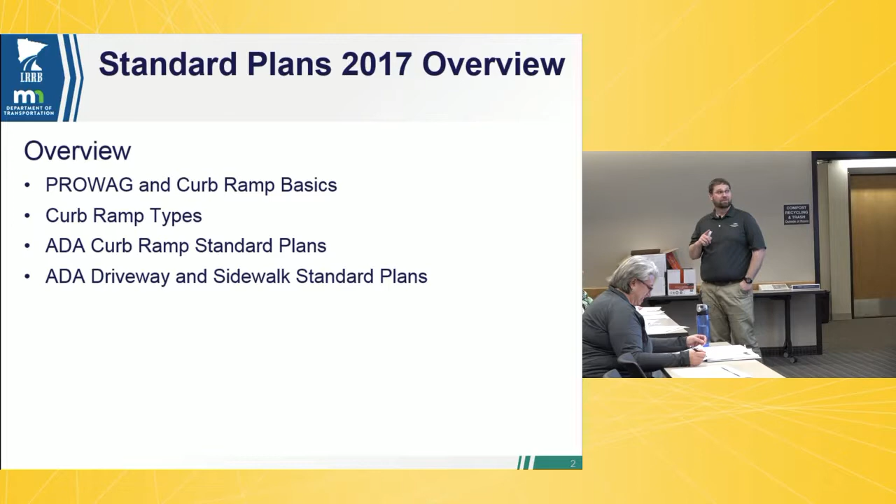In the next couple hours, we're going to talk through ProWAG and curb ramp basics, the curb ramp types, and then those standard plans. In 2010, MnDOT implemented ProWAG, which stands for the Public Rights-of-Way Accessibility Guidelines. Anybody here read ProWAG?

Anybody have trouble sleeping at night? It's a 64-page document, there's a link to it on MnDOT's website. Everything we're going to talk through today is also on our ADA website. If you go to MnDOT A to Z, click on ADA construction, there's a whole website there with links to ProWAG, links to the standard plans, the CAD files, the DGN files for those standard plans. These presentations are on there, and the webinars will be uploaded there soon too.

So all of this information is a really good resource guide if you've got questions. But ProWAG is there also, and ProWAG is really the foundation for what we're going to talk through today. If you've got questions on the why, sometimes there's also the answers on this sheet here on these four. We talk through the standards, and then there's the answer of why we do some of those standards. But if you need further explanation, ProWAG is a good resource.

Now in ProWAG, it also talks about this 4-foot wide pedestrian access route. We have to have that 4-foot PAR with a maximum cross slope of 2%. So ideally, we're shooting for 1 to 1.5% on all of our cross slopes on our sidewalks. But also with that 4-foot minimum PAR, there's a minimum passing area, a 5x5 area every 200 feet.

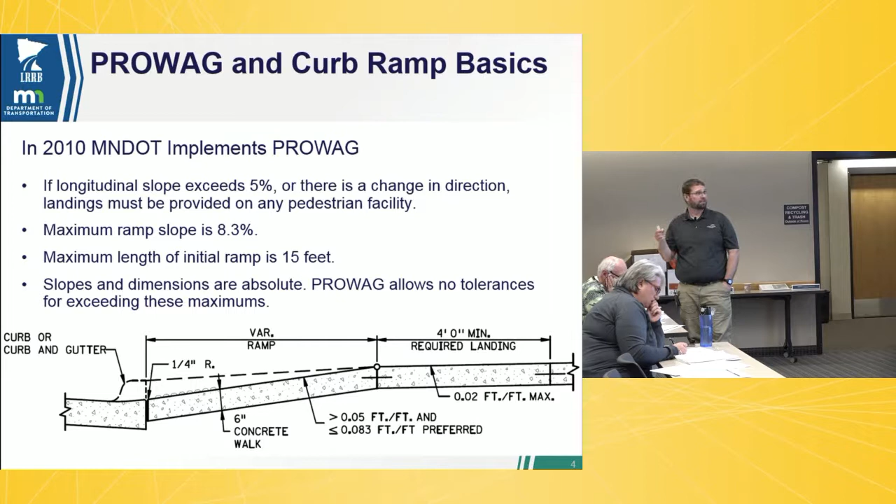That maximum ramp length for the initial ramp is 15 feet, and those slopes and dimensions are now absolute. So there's no variations from that.

So this was the standard plate from 2004. This was a standard plate that I started utilizing in my career. I'm sure that we all built a lot of plan sets utilizing this standard plate. We went along and we had our road corridor, and we had our street laid out there, and we got to the intersection. We said, build a ped ramp. We put a note, and we moved on to the next section of road.

In this standard plan, all of our ramps were based off of our lengths. So if we had a 6-inch curb height, we had a 6-foot ramp. And actually the ramp was 5 foot 4 inches because we included the 8 inches from the curb and gutter from the back of the curb too.

So that works for a 1 to 12 in a perfectly flat world. Does anybody here design intersections in a perfectly flat world? No. There's a few places out in western Minnesota that get pretty flat, and they don't even have some of these flat intersections. So it doesn't work.

It's not practical. And also on here, we had the desirable 4x4 relatively flat landing. There's nothing in there that says that landing area is desirable. It's required. We have to have that landing area.

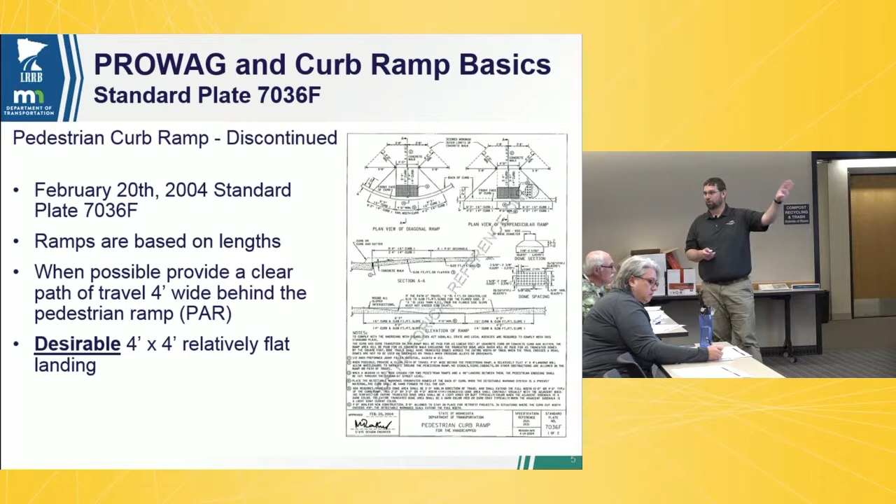So essentially what I'm telling you here, when we built ramps like this, MnDOT went out there and did our inventory on everything. When we looked at just the running slope and the cross slope on the ramp, just those criteria, we exceeded those maximums on 50% of our ramps. Just on those two criteria. Essentially, this is just what we were building. We built these for years, and the majority of them are non-compliant. So in 2011, we changed this detail sheet, and we built all of our ramps.

And all of this is switching to be based on ProWag, and the ramps are now based on the grades. So we're now working off of those ProWag maximums and minimums, and we required that we have that 4x4 relatively flat landing at the top of those ramps.

So this is where we started to go as far as our progression. Now, the other part is that we started off with, like I said, we put our roadway in there, we put a note and said, build a ped ramp. Then in 2011, we started to get into this, 2012.

And construction folks went from, we just had a note, to design and detail everything out for me, okay? And we ended up with quadrants that we had 20 or 30 elevations given on the plan sets for each quadrant of the intersection, okay?

How many folks in here have done surveys? Few? How many of those people have pounded in 20 or 30 hubs for elevations on a quadrant? Nobody. Contractor would laugh us out of the room, right?

Plus, I mean, and the other part of it is we were designing those 20 or 30 grade points off from aerial LiDAR, plus or minus 6-inch data that we were getting inputs on, and we're designing all the way through here. The other part, and actually if you watch some of the slides here today, you're going to see a number of examples where we go too far, okay?

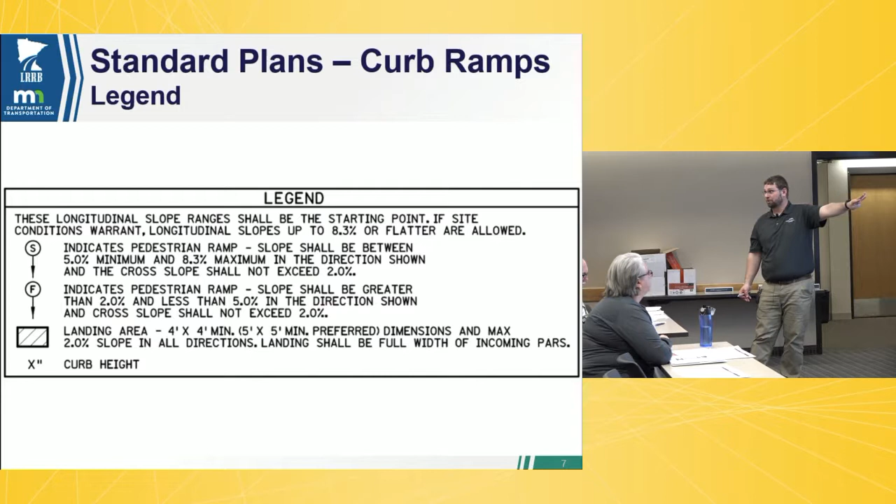So those are the 4 key points that now we're putting in and utilizing this standard legend. And again, this standard legend, and it's actually much longer than this, but these are the 4 key components on it. This is on MnDOT's ADA website also too. There's a DGN file that talks about what's all going, that gives you all of those symbols.

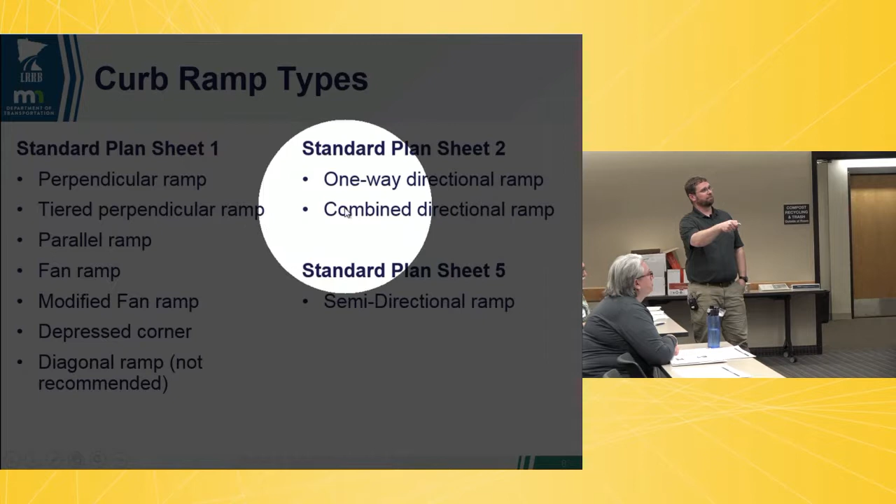So here's our curb ramp types. If we took these two, the directional ramps, and slid them right underneath our perpendicular ramps, this list on the left-hand side is my priority list. So if I can build these ramps, I'm going to build perpendiculars, directionals, then get into my fans and my depressed corners, and at the very bottom of the list is my diagonal ramps. This is my priority list.

So on my second ADA project that I did with MnDOT, I went out into the field. We did a constructability field walk, and we were walking through it, and we got to the first area, and Harvey from the ADA office looks at it and he goes, 'Tim, you've got this too flat.' I laughed because that's kind of how I handle situations, and Harvey's a little bit more stoic. He didn't find it as funny as I did. But I said, 'This is ADA. It's supposed to be flat.'

And we proceeded to have a long conversation about how it's not just about being flat, it's about being sustainable and being maintainable. That's something we've really come to see and evolve about over the last 5 or 6 years too - we've got projects where we're going to be putting down this concrete, and when we put this concrete down on the ground, how long is that concrete going to be there for? 30, 40, 50, 80 years? I mean, how often do you have concrete that you've seen that's been there for 80 years? When we put that concrete down there, it's going to be there for a long time.

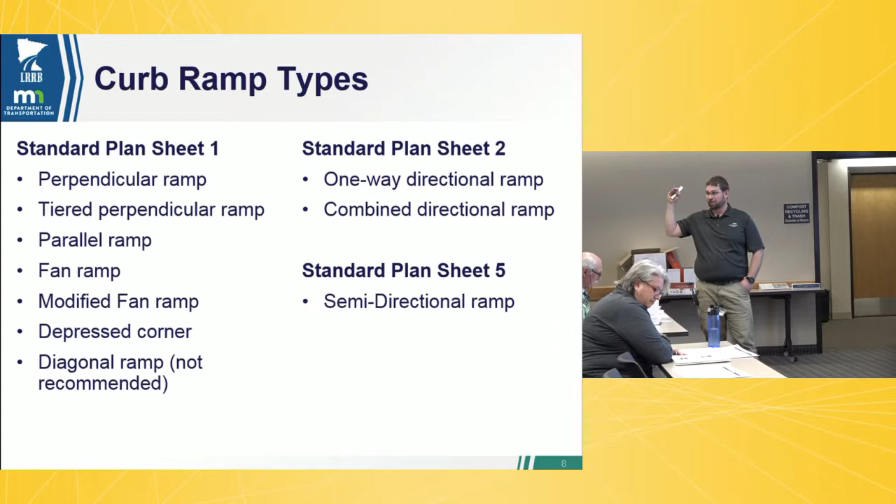So in the afternoon we're going to talk through a lot of things we can do as far as some little improvements to these intersections and ramps that are going to make a big difference to be sustainable and maintainable as we're going forward. So this is our priority list - that's why, if we can, we always want to build our perpendiculars, our directionals, and then proceed down the list.

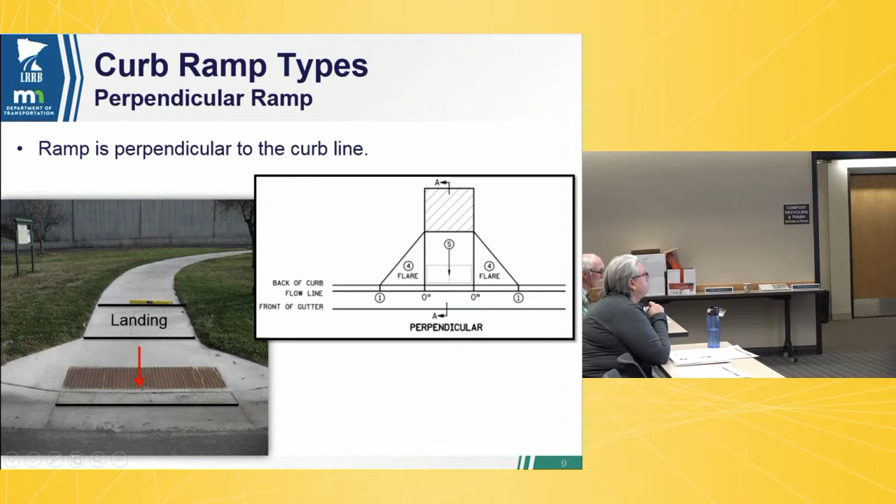So we'll talk through these one at a time. Perpendicular ramps - these are the easiest to build. You've got a nice tangent piece of curb and gutter. Your ramp is going to come right down here in a perpendicular direction, meeting that curb line. We've got a perfectly nice even ramp.

We've got a landing shown on here. Now if this sidewalk is coming in at less than 5%, and we don't have a change in direction on this particular example, you wouldn't have to have a landing. However, I would highly encourage that we make sure this initial ramp in here is a steep ramp, so that we're up and out of that gutter line, maintaining that flow line in the gutter line and not up into our ped ramp. And then you have your landing and then you take off with your nice sidewalk from there.

The next one is going to be a tiered perpendicular ramp. This is the same situation, but the difference is we've got a very narrow boulevard. So when you've got a 3-4 foot wide boulevard, you've got enough distance in there to get a ramp, but you're not going to get your landing up to your full sidewalk height.

So then what we're going to do is we're going to have this landing up here, right there, and then we're going to have flat slopes coming in from both directions. And we don't want to have steep slopes coming in on our secondary ramps, because we always want to make sure our sidewalk profile is less than 5% unless our roadway slope is greater than 5%.

The other part of this is, let's think about it from a practical standpoint. I'm walking down my sidewalk. If I'm just going in a straight direction, do I really want to go down 8% for 5 feet to then come back up 8% at the other side of the landing? It's going to be very awkward to be walking up and down that sidewalk.

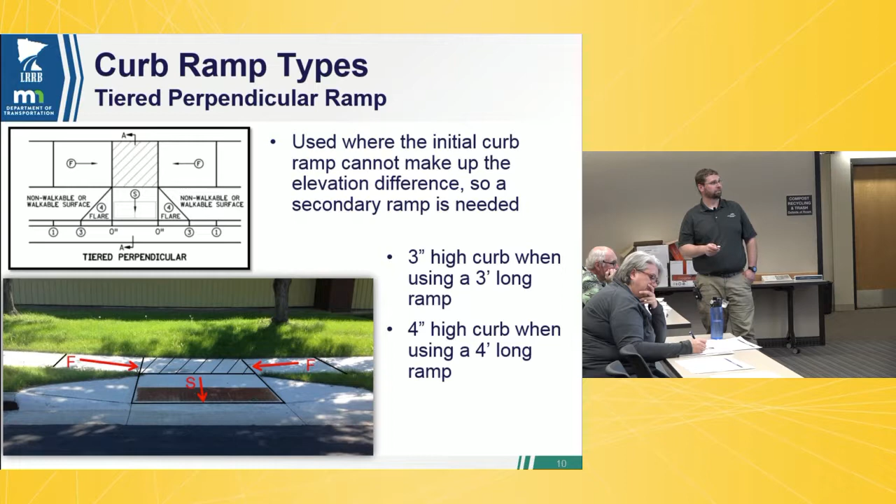Next one is our parallel ramps. Parallel ramps are going to be utilized whenever we have sidewalk at the back of curb and our sidewalk is less than 7 feet in width. So if I have a 7-foot wide sidewalk at the back of my curb, I'm going to put in a 3-foot ramp and have a 4-foot landing behind there.

But if I've got a 5-foot sidewalk or a 6-foot sidewalk at the back of the curb, I'm going to have to utilize a parallel ramp. It's basically a depressed corner. Everything from my gutter line all the way through the back of my landing is all 2% max in any direction. It's all landing area.

So then with that, my initial ramps are now these first ramps coming up the sidewalk line here. And I'm wanting to make sure that those are steep ramps now, because I want to get up and out of that gutter line as quickly as possible. Because this area, that landing area, is going to be prone to having ice and snow buildup in there.

And doing this, then those are steep ramps, so we've got to have a secondary landing at the top of those ramps. That's why we've got these secondary landings hatched up here on both sides.

And then also, you'll see the curb heights in here. So we're going to clearly define where our curb heights are going to be, because the top back of your curb profile, the tapers on that, is going to define what your sidewalk profile is. So you've got to make sure that taper is built to the ramp slope that you want on your sidewalk. Clearly defining where that 6-inch curb is is key to making sure these ramps are constructed right.

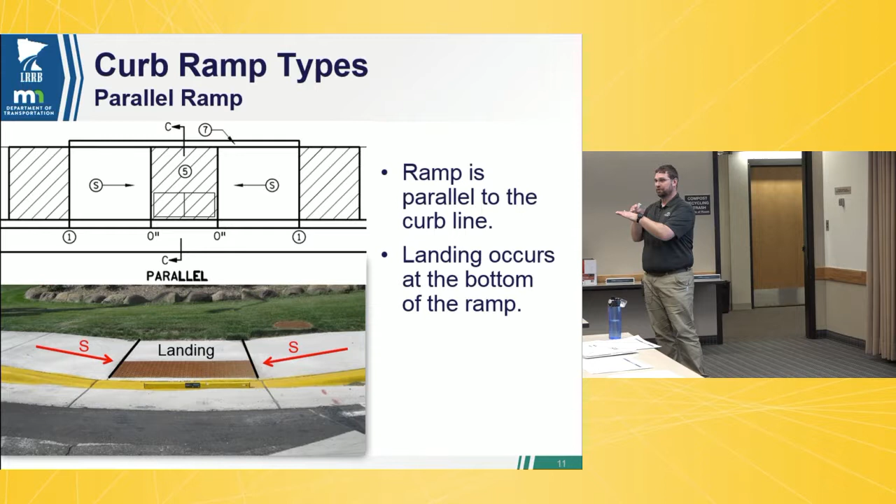Because if you don't do that, you're going to end up with a warp on your sidewalk on the back side, where you're either pushing drainage back onto your ramp, or that's also a spot that if this is being cleared with a skid loader, you're going to ride up on the curb and ride on the back of the sidewalk, and you're going to have a little area in between there that's not going to get cleared of snow and ice.

So making sure that we have our curb heights on here on these parallel ramps is going to help make sure that they're constructed correctly.

Next ones are going to be fans. With those fans, we're always having those fans constructed with flat slopes, so everything between 2 and 5%. A couple key reasons why: first off, under PROWAG, fans are treated as blended transitions, and blended transitions need to be less than 5% slope on them.

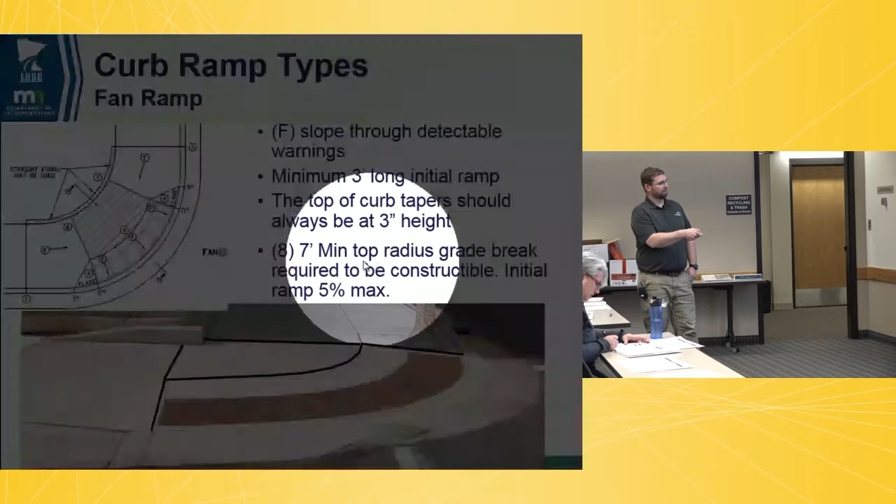The other part of this is if I'm a user and I'm coming along my sidewalk here and I'm going to go straight across the roadway, as I come through here, I should stop on that landing and navigate that ramp in a perpendicular direction, so that way if I'm in a chair, my front wheels go off and onto the ramp at the same time, going down the ramp, and then my back wheels go onto the ramp at the same time.

But chances are we're just going to go straight through this section, and as you do that, you're going to end up with that front right tire going off into the air. So I'm on 3 wheels, then ideally maybe I drop down on the other 2.

As you're going through this section, you're going to have a potential to be on 2 wheels, especially if you're on a steep slope with a real tight radius—you've got a real potential to flip. One of the first people from an early class said they realized this pushing their kids through on a stroller: you're only on 2 wheels going through those intersections, and you can rock them in the stroller as you're going through there. So when we've got those tight radiuses and steep slopes, you've got that potential.

So we've also got a 7-foot minimum radius on the top. That's this area right through here, this grade break—7-foot minimum radius, okay?

Part of that is mostly a constructability issue. We've tried to construct them with tighter radiuses, 3-foot or 5-foot radius on the top. Contractors and suppliers will give us the truncated domes for it, but when you try to put those domes on a slope surface going around that tight curve, it's extremely difficult to do. I'm going to show you an example we tried on one of our projects—it took us a couple times to pour it to get it right. It's one of the examples of why we have this 7-foot minimum as a standard now at MnDOT.

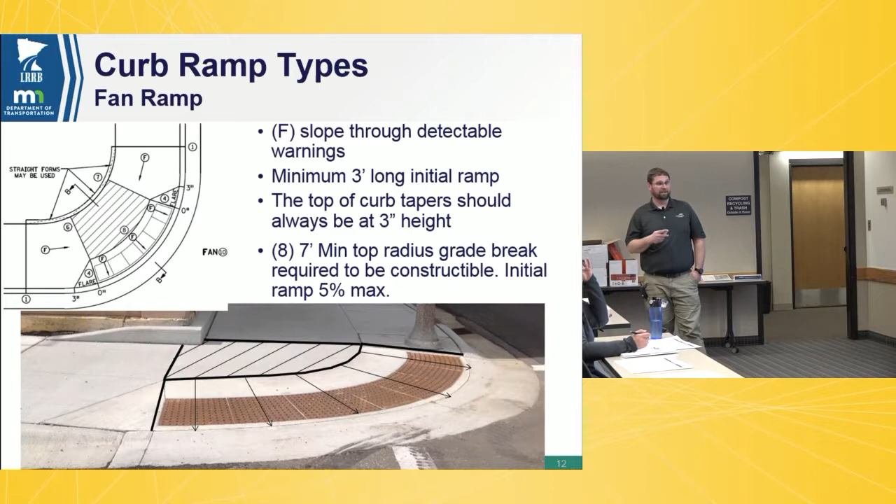The next one is going to be a modified fan. It's the same as the fan, the only difference is that if this was a fan, our grade breaks would be right here. We've pushed those grade breaks up in both directions so we can get our 4x4 landing in there. If my grade breaks were in line with the back of the sidewalk, I wouldn't have enough room to get my 4x4 landing in there. So this modified fan pushes it back.

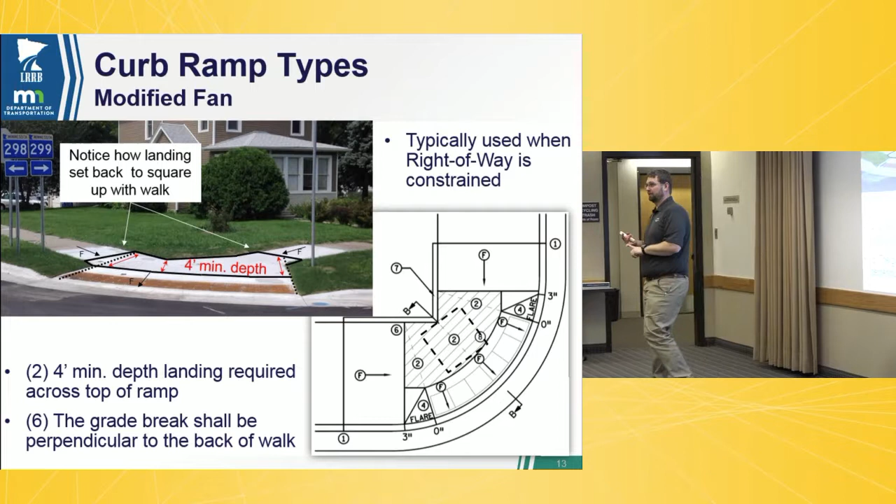It's a good tool to utilize when you've got a really tight right-of-way constraint, when you don't have a lot of room between this pinch point on your corner and your curb line. All you need is 7 feet in there and you can make that work—you can get your 3-foot ramp in there with your 4-foot landing at the back of it. It's a good tool to use on those tight corners. We're going to talk today about how you can widen out this corner to make it work, but ideally you'd do some of those other modifications to have more room. If you can't, the modified fan is a good tool to use.

Next one is our depressed corner. Depressed corners are towards the bottom of our list of what we want to utilize, and the main reason is, yes...

4x4—you can do a 4x4, that's the minimum required. Yep.

On our depressed corners, very similar to our parallels, the landing is everything from the back of the curb, from the gutter line back. So the gutter line back is all less than 2%, and this whole area in here is all less than 2%.

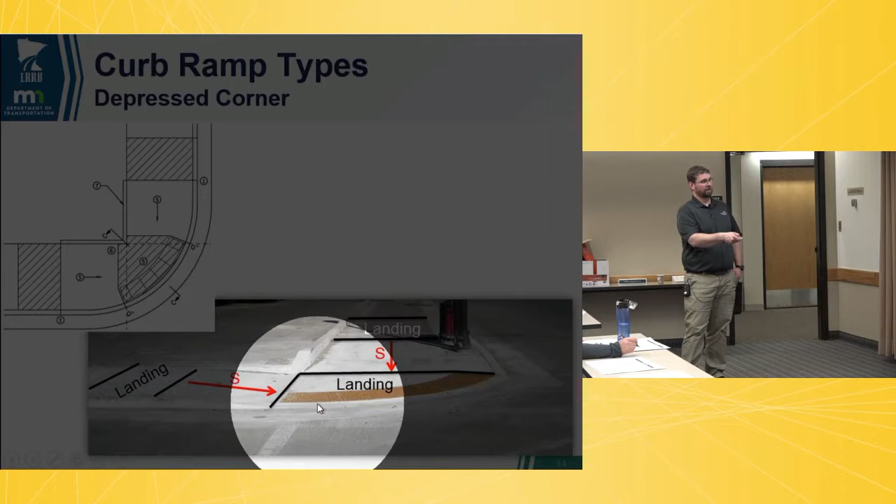Depressed corners are very prone to ice, debris, and those types of things since your water is just flowing right into there. They're very low on my list, but if I'm at a high point in my road as far as the intersection, with water going both directions around my returns, I'm not going to hesitate to utilize a depressed corner in that instance. Because all I've got for water coming into that depressed corner is just what's falling on that intersection and draining back towards it, so I'm not as prone to those ice and sediment issues when I've got that at a high point.

Now, we can create a high point too, and we'll talk through some of those scenarios. We'll add a structure, maybe on one side, if there's already one on the other side, and create a new high point as we're going around there. That way we have that potential and we're not running water across there. If I've got a whole block's worth of water coming down here, I'm not going to put a depressed corner in and run a block's worth of water around a depressed corner.

That's not going to be a maintainable, sustainable solution. But when we've got to put these depressed corners in, a lot of times we're going to utilize them when we've got tight right-of-way constraints or we've got APS where we're trying to fit a lot of things in. Those types of situations, we're going to end up with some depressed corners.

When we've got the depressed corners, then those initial ramps are going to be following the top back of curb profile, and those are always going to be steep because we want to get up and out of that gutter line as quick as possible.

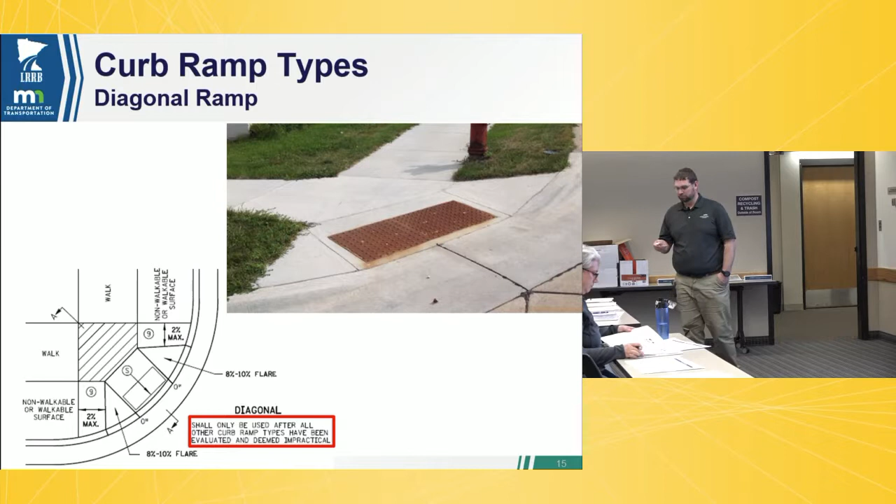And this is why: because we're pushing all that traffic right out into the middle of the intersection. Whether it's a chair user, whether it's a visually impaired user, all those things, they're all going to end up right out in the middle of that intersection on a diagonal ramp.

Next one is going to be our directional ramp. So remember, perpendiculars was number 1, directionals is number 2. With the directional ramps, all of this area in here, this curb line here, where note number 7 is, that's max 2% slope in any direction.

So it's constructed to the same constraints as a landing, and that is poured integral with the curb and gutter. They pour the curb and gutter, they're pouring that directional curb with it. All of our contractors on MnDOT projects have been pouring this integral for a lot of years.

So if any of them are giving you a hard time, saying no, MnDOT's not making me do this - no, they are making them do it. It's all constructed that way. It helps us to end up with a better end product, that we've got a seamless, no joints along where that back of curb line would normally be.

And just to be clear, it's this 2% to the same slope as a landing, but it doesn't have to have the area requirements - the area doesn't have to be a 4x4. Basically, that just all needs to be there though, so you have a perpendicular grade break at the bottom of the ramp. So your top 2 wheels going off the top of the ramp being the same, here where they hit the bottom of the ramp, it needs to be perpendicular.

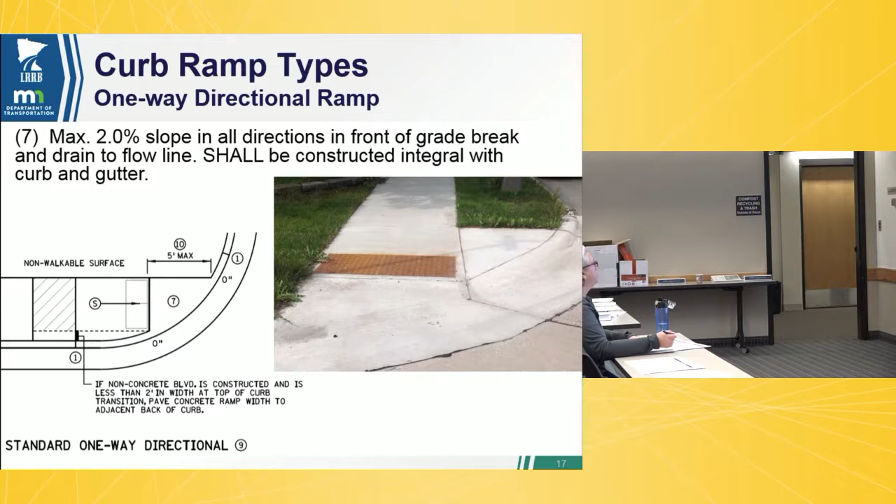On this previous one, when we've got a walkable, non-walkable surface here, the non-walkable surface is our grass or aggregate surfacing, so we can have that grade break with domes set back 5 feet. If we exceed that 5 feet, then we put our domes at the back of curb. When we do that, we want to make sure those domes fully cover the walking path for a pedestrian going up and down. That's why there's a little bump on the back side of that walk as you're coming through, so I've got 2 feet of domes across my entire path of travel. If I just left this as a straight piece of concrete, my domes would come out at an angle and I'd have a step-through at that location. So that bump ensures 2 feet of continuous dome coverage across the opening. Part of that reason is because in Minnesota we have to use cast iron domes, and we don't want to cut those because they're difficult to cut, don't always seat well, and have ragged, sharp edges. So we have more limitations due to winter maintenance requirements of the materials we use.

Next is our combined directionals. A combined directional is still just that directional ramp, but with a combined landing. A lot of times if you're working in a residential neighborhood with nice big boulevards, you'll end up with combined directionals or combined perpendiculars. The only difference is that perpendiculars deal with a tangent piece of curb and gutter, while if you're in the curved portion of your curb and gutter, you'll end up with directional ramps. The best type of ramps let us walk in either direction on this sidewalk, just walking straight across the road, without any change in direction needed to navigate the intersection.

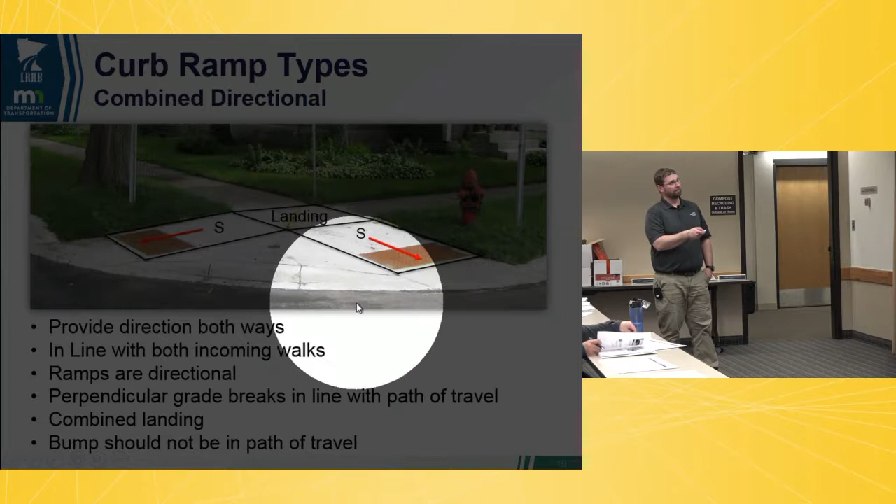We've got that combined landing utilized for both ramps, and we still have those perpendicular grade breaks, because a visually impaired user relies on the first two cues to know where they're going: one, the direction they've already been traveling, which tells them to keep going that way across the intersection. The next cue is the ramp direction, which points them across the road. So anytime I can give that directionality, whether perpendicular or directional ramp, I'm pointing that visually impaired user across the road. We also want to make sure this bump in the middle of the walk isn't within the path of travel, because otherwise we'd be creating a trip hazard.

Again, on dome setback: if we've got a non-walkable surface, like turf or aggregate surfacing, those domes can be set back 5 feet. If it's a walkable surface, meaning bricks, pavers, concrete, or asphalt, the max setback is 2 feet from the back of curb. So if I have a signal pole, light pole, or fire hydrant right at that intersection, I'm going to consider that a non-walkable surface. However, if that same obstruction is 15 feet back up the roadway, that's a walkable surface. That's where you have to use engineering judgment as to whether there's potential for someone walking down that sidewalk to walk out into the road and miss those domes. That's what we're trying to stop from happening, making sure there's notification that a user is about to enter the roadway.

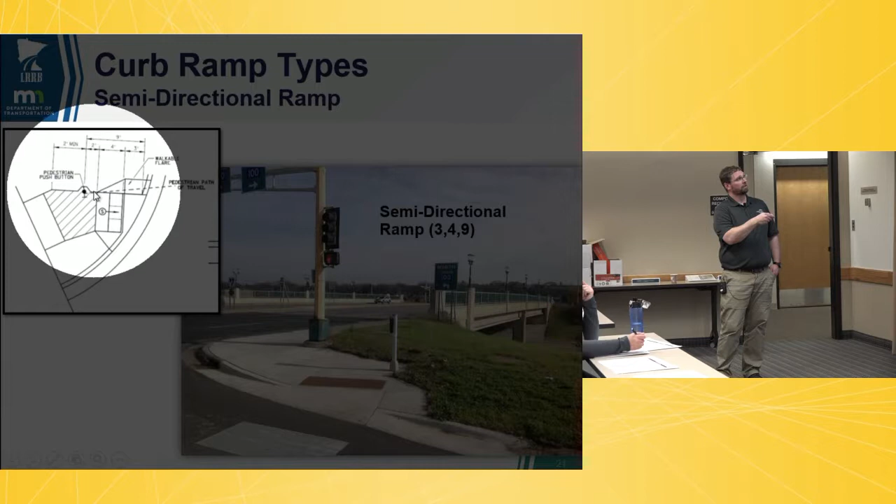Semi-directional ramps are a detail thrown into the plan set. It's primarily utilized with APS systems in more of a rural application where we've got a large sweeping curve. If we were to provide true directionality on this ramp, we'd exceed our setback for our APS system. So we're swinging this ramp around to give it as much direction as possible. This dashed line is my path of travel, trying to get directionality out of those ramps, but we'll call this our 3-4-9: a 3-foot setback on my domes from the back of curb, a 4-foot ramp, and 2 feet to my push button on the landing. So that push button ends up being a total of 9 feet from the back of curb.

When we look at APS criteria, the maximum that we want to be with that push button is 10 feet. So if I provided true directionality on this one, I would exceed that 10-foot setback. So it's a trick, a detail that we've been utilizing quite a few times trying to get as much directionality as we can, but still utilizing that APS and not exceeding that 10-foot setback as we go around here. This is one instance here where we do require a walkable flare.

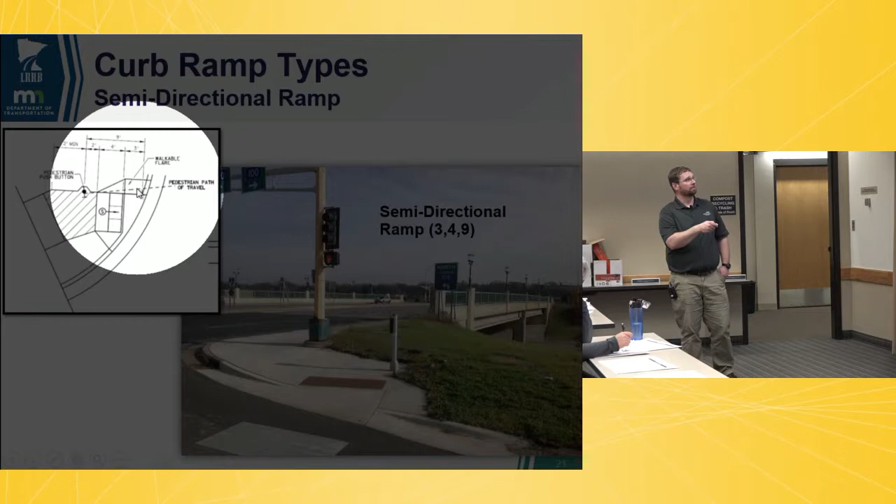This area here, this flare, is a concrete flare. A lot of times on a lot of the different ramp styles that we're going to talk about, flares are up to the local city's preference, if you want a graded flare or a concrete flare. But in this particular instance, if we've got the path of travel that's going to go across those flares, then we want those to be concrete, so that we don't have that grass lip as far as a trip hazard going up and across there.

So sheet 1, these plan sets were revised in 2017.

So I got a question. You went through your ramp types, and in Minneapolis, when the mall was redone recently, if anybody's been in Minneapolis doing a mall experience, the intersections, the design of the intersections actually were raised up, so there was actually no grade change as you cross the streets there. It's the flat surface except for the ramp step. My question is, that's kind of a different style or type of ramp than what you're showing here. And my question for you guys is from a user experience, when I walk through it, it's pleasant because you're not walking down and up. Being accessible, is there anything by not having those grades that might be noticed?

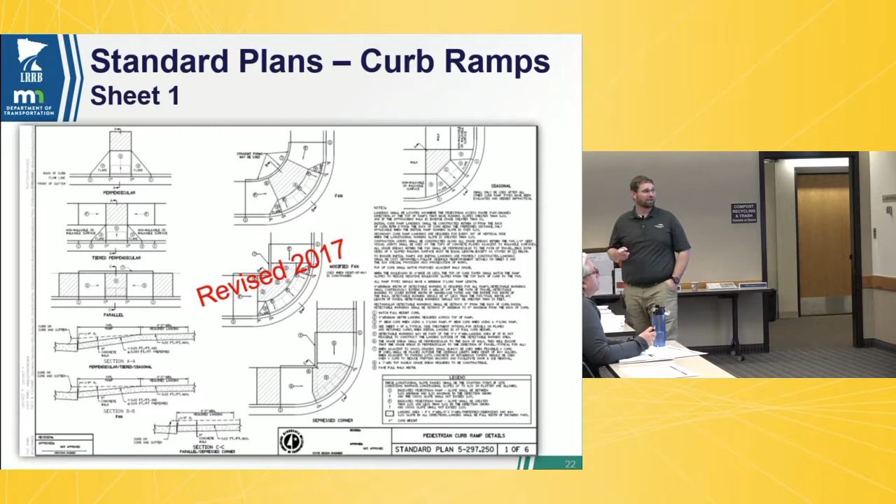The good news is that in conversations we've been having, we're not foreseeing another plan set coming out in the near future. I'll be happy to eat my share of crow pie if I need to, but that is not our anticipation right now. These standard plans will be here for quite a while. I totally understood the frustration too, because I was right there with you guys - I'd turn something in and all of a sudden they're like, Tim, you only have version 5, you need version 6. But these have been around now for a year, so we'll talk through these in detail now.

A couple notes, can't stress this enough: landings need to be located anywhere the pedestrian access route changes direction. So in this case here, I'm coming down my sidewalk, I've got a ramp going off to the side - that's a change in direction. I need to have a landing wherever there's a change in direction. That may be a walk coming out from a home - that's still a change in direction for someone. We need to have a landing at that location.

At the top of all those ramps greater than 5%, whenever we've got those steep ramps - that's why we have this distinction between greater than 5% and less than 5% - we go greater than 5%, we've got to have a landing at the top of those ramp slopes. And then also if our inverse grade is greater than 2%, so if we've got those tenting effects, then we need to have a landing at those locations also.

Our initial curb ramp landings need to be constructed within 15 feet of the back of the curb, ideally we want to be 4 to 6 feet back. So if I'm back 15 feet sitting on the landing, with my roadway 15 feet away, and then I'm having to cross a 30-foot wide roadway, I've just added 50% onto my crossing distance, because as a chair user I'm going to sit on the landing and navigate that intersection from there. Now, if I'm back 15 feet, think about being a chair user at that position and how well you can see to make decisions about where your traffic gaps are. And then the other part is where a driver is going to be looking for pedestrians to be starting from. So ideally we want those initial landings to be 4 to 6 feet from the back of the curb.

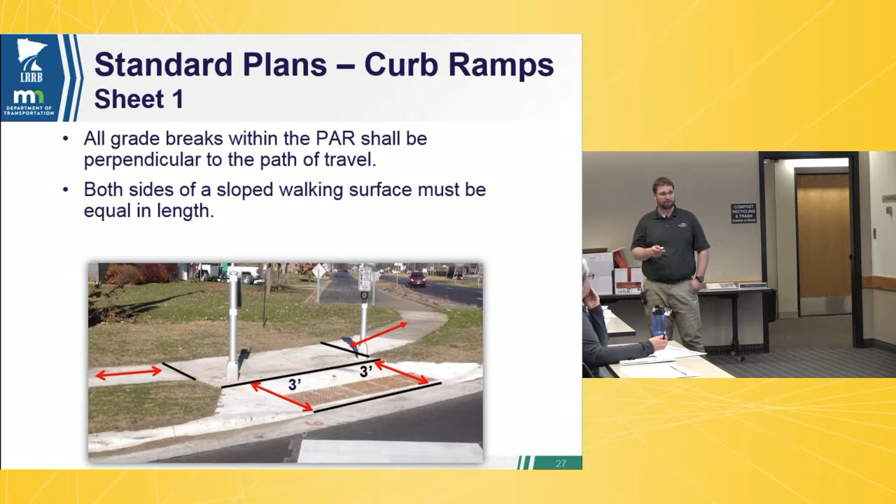So in this case here, we don't have a perpendicular grade break. My grade break should be right across in here, is where that grade break should be. So we want to make sure that those ramp lengths are all the same length, and that our landings are all constructed properly. And what happens is that in this instance here, we would have ended up with this.

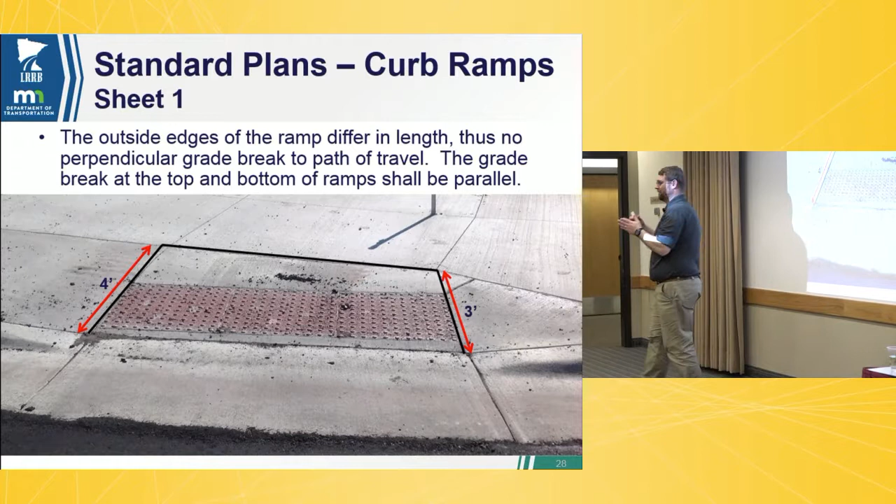Here's always the problem, okay? When we have nice square intersections in a residential neighborhood, we end up with nice landings that are all squares, right? And we're all engineers, we like to deal with squares. Sometimes we step outside of our comfort zone and we'll deal with a rectangle. We've all built stormwater ponds that are all rectangles, right? Now sometimes these landings are going to end up being some odd shaped polygon, okay?

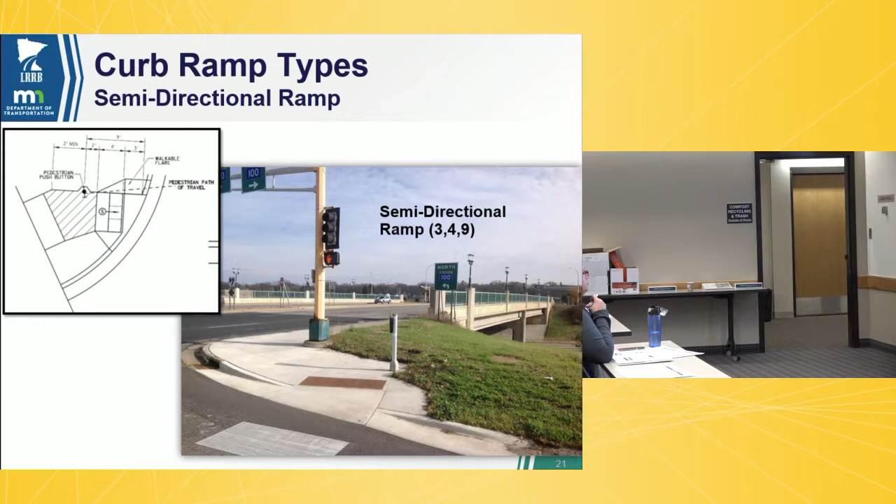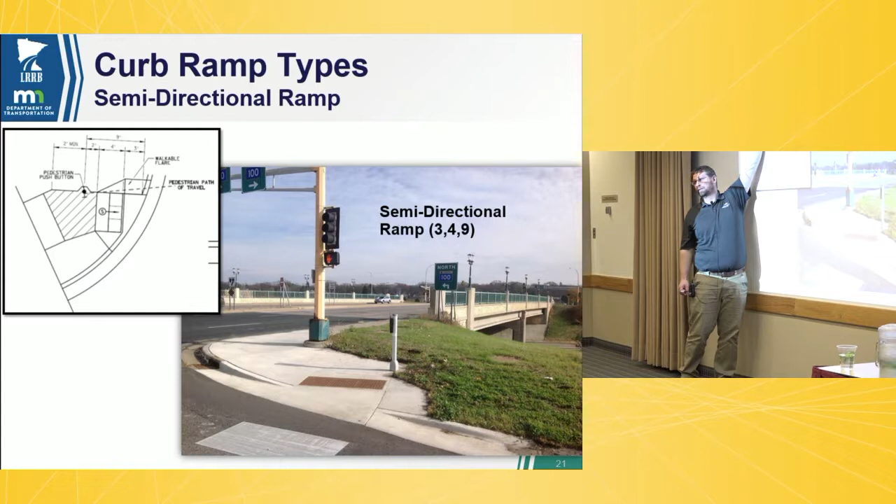In this instance here, here's my direction of travel, so my grade break has to be perpendicular to that path of travel. Over here, here's my direction of travel, my grade break has to be perpendicular to that path of travel. So when you're working out all these different directions that you're coming and going off of your landing, that's where you end up with those perpendicular grade breaks and these odd shaped polygons as far as your landing. So that's why we need to clearly denote on our plan sets where those landings are at. And that's also why we require that those landings be poured separate. So we're doing those initial landings at the top of those initial ramps, all being poured separate, so that way we get those grade breaks properly constructed.

So we started off doing this a few years ago. MnDOT started off doing this a few years ago with fan ramps only. When we switched to requiring that these fan ramp landings be poured separately, our initial compliance just jumped. We're tracking all those numbers and knowing it, and we went from struggling with compliance on those grade breaks to getting that compliance on the majority of those ramps when they were first constructed. So MnDOT is requiring that those landings be poured separate.

So I've heard the argument a lot of times from contractors, and they especially start to get into your guys' ears, and they start to tell people that it's going to cost you more to do that because it's going to be another MOB charge, I've got to come in here another time, it's going to be another small load charge on your concrete coming into the job. And actually, we've had contractors say no - the ones that know what they're doing are pouring that landing at the same time that they're pouring the curb. So they're still there one time to pour, still getting one delivery for that concrete for that intersection. So it's not adding an additional cost for those mobilizations and for that concrete being delivered to your project.

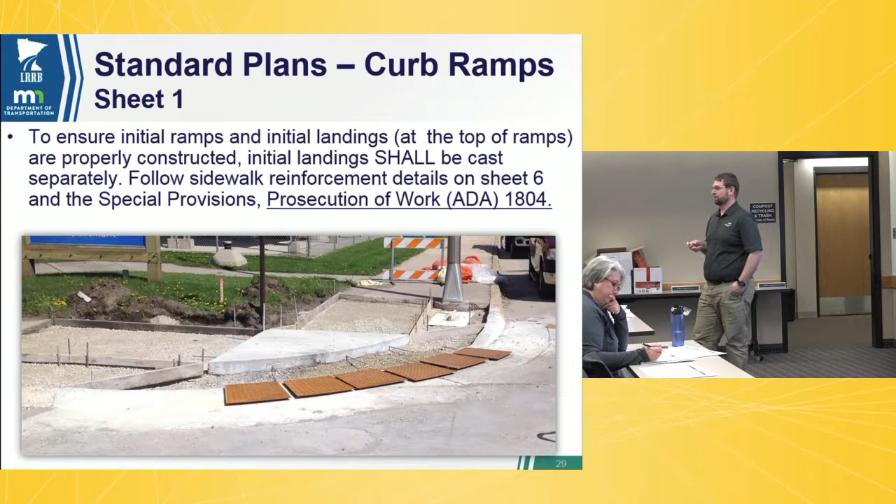And I realize that's not a lot of room for designers to work with. It's a lot of variation, right? 1 to 1.5%. But really we need to make up those grades in other places. That's what we're going to talk through too, the different tools that you can utilize outside of those key constrained areas. Does that answer your question? Okay.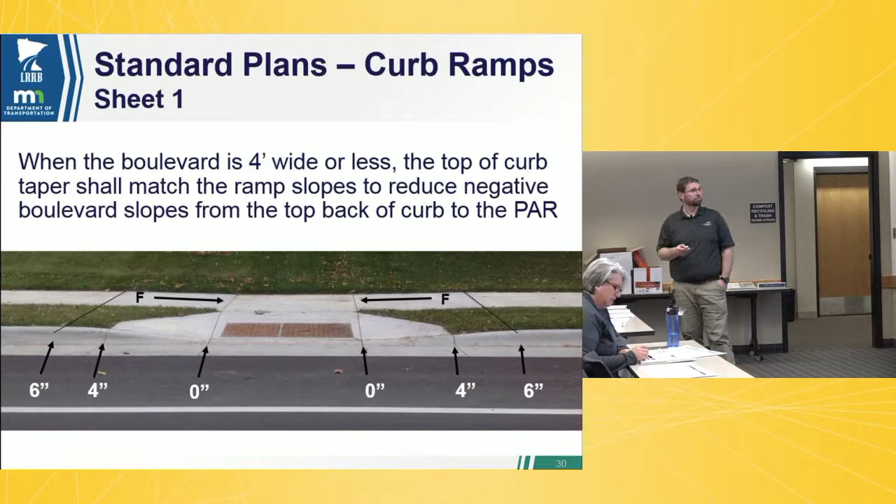Things going, so that way we try and get done by the end of the day at 4:30.

So we'll start off with sheet 2, and I'll tell everybody right up front, if you're not in total panic situation, because it just took us an hour to get through sheet 1, it's not going to continue on that same pace, okay? Because otherwise we'd be talking standard plans for the next 10 hours. So, sheet 2.

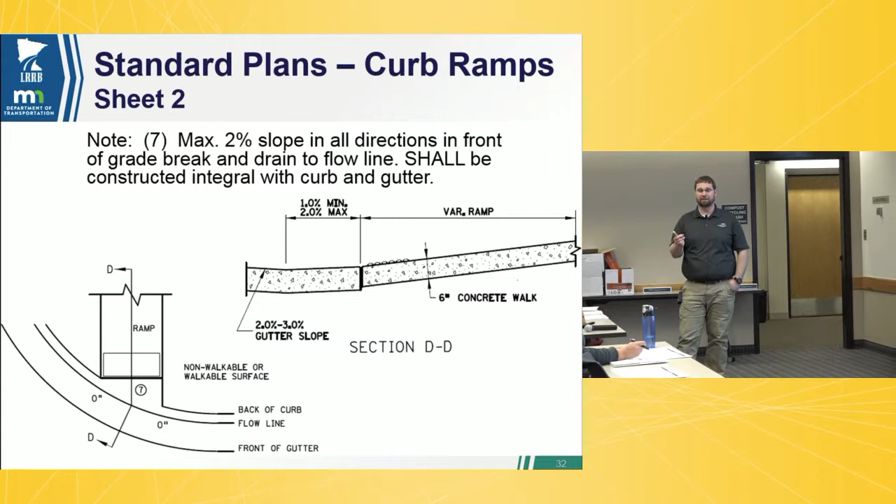Again, this integral curb, we want to make sure that on that directional curb, it's all constructed at 2% in any direction, and we want to make sure that it's drained to flow. So we want positive drainage going out of there, but we're still at that 2% max. Our walkable flares are going to be 8 to 10% slope. And this is a good one too, where we've got this 2-foot dome setback along here.

This is a good example of depending on a different visually impaired user and what's going on with your sidewalk. On this particular example, they may be walking along the back of the curb or the back of the sidewalk as their cue. They may also be walking along this joint right here between the pavers and that PAR. The other aspect they might be utilizing, if your boulevard is clear of any obstructions, is walking right along the back of the curb and utilizing that as their cue of where they're going up and down the roadway.

So that's where we want to make sure that we've only got that 2-foot max dome setback, so if somebody's walking along the back of the walk here, they're not going to walk right out into the middle of our intersection.

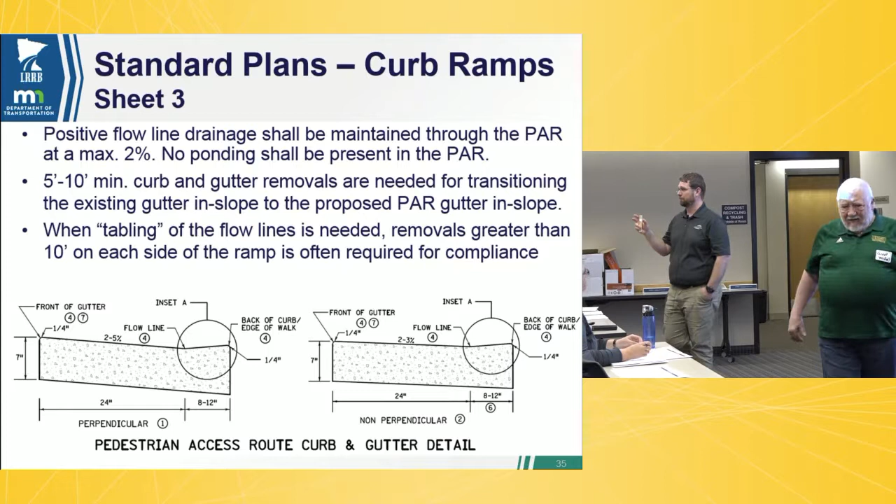So when we've got our positive flow drainage, we want to make sure that we're maintaining that 2% flow across our pedestrian access route. Again, we're shooting for 1 to 1.5% across those flow lines of our PAR, making sure that we've got positive drainage, but we're not exceeding that 2% max cross slope.

We're also saying here that when we're transitioning our curb lines, if we're in a perpendicular nature with perpendicular curb lines, our typical inslope on our curb and gutter is 6%. We need to flatten that out to 2 to 5% if we're in a perpendicular nature. If we're in the directional curb, the fans and stuff, that needs to go down to 2 to 3%. So we're saying you need 5 to 10 feet of curb removal to transition from 6% down to 4% as you're going through your returns.

The other part of this is that if we're doing tabling, we're going to talk through some different aspects and a little bit of tabling of our intersections to get that PAR at less than 2% going across our crosswalks, and we need to make sure that we have at least 10 feet or more of curb removal in order to get that tabling to occur.

If you utilize MnDOT's preconstruction work and our standard specifications, it is now in our standard specials that we've told our contractors: if our grades aren't working, you can just take an additional 10 feet of sidewalk or 10 feet of curb and gutter without telling us. We're seeing it as a problem across the board that we're always trying to set our construction limits too tight. So we said if there's an issue and you can't make your grades work, take another 10 feet, we'll pay you for it. Don't come bother us, because we know it's an issue of getting those removal limits set.

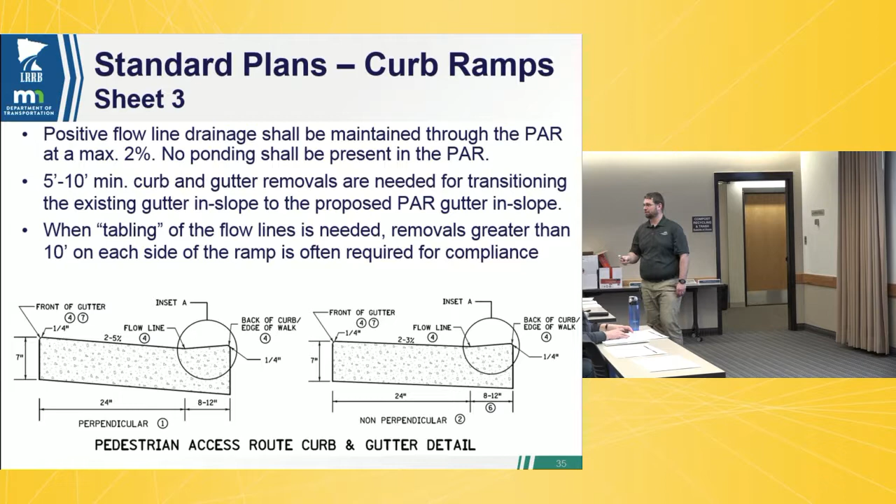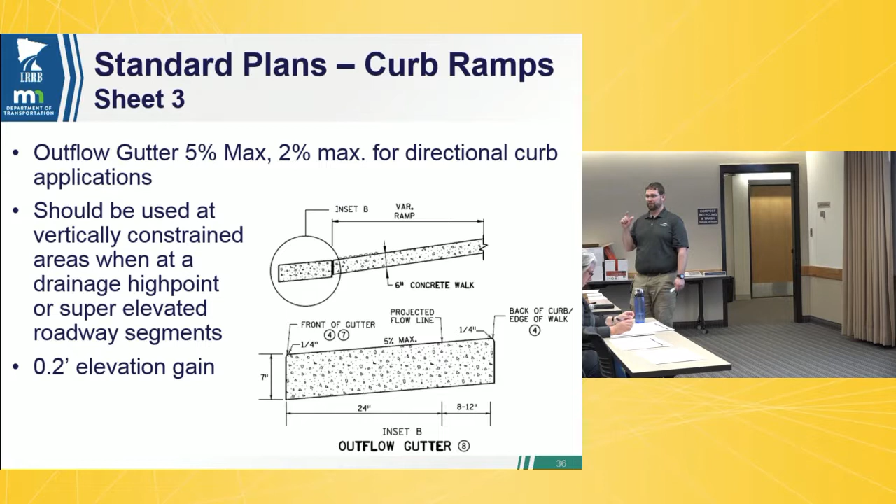Outflow gutter is a detail shown here. It's utilized when we've got vertically constrained points. So rather than our curb line, our gutter line coming down at 6%, we're now tipping that up at 5%. That gains us 0.2 of elevation by doing that. I'm not going to utilize this if I've got a block's worth of water coming around my intersection or quadrant. But if I'm at a high point with water going both directions, I'll put an outflow gutter any day of the week to get myself some additional vertically constrained areas. It's a good tool to utilize if you've got that tight doorway or something you're trying to tie into, to get you a couple tenths.

We want to make sure our max rollover is 13%. So if the slope of your ramp is coming down at 8, we're only going up at 5. Now let's talk about crosswalk running slopes. Crosswalk running slope is the cross slope of our roadway, which should be 5% max. It's going to be that pedestrian access route as we're going across our roadway.

This is a new detail shown here. This is our combined directional compound radius curve. It's going to help gain you some additional ramp length. So here's our curb line, and here's our curve if we were to utilize a simple curve as we're coming through this intersection.

Now if I utilize this line going around here with a simple curve, my ramps are going to start right here - that's going to be my ramp length. By utilizing a tangent, extending out that tangent, putting in a really tight radius here, a big sweeping curve through here, and a real tight radius up here, I've extended these ramps a couple of feet. That's going to gain me a lot of elevation - every foot of ramp I gain, I'm gaining roughly an inch of vertical. So it helps with getting up a little bit higher.

It also helps us get 2 ramps in here. With this simple curve as before, I'm probably going to end up with a fan ramp in this particular instance. When I bump this curb line along, extend those tangents out, and put these curves in, I'm going to end up with 2 separate ramps going through here. So a couple of benefits: we're putting this tangent piece in the middle, this bigger curve, to follow our truck movements as we're going around that corner. You may even run your AutoTURN going around there and then back your curb line off to fit it.

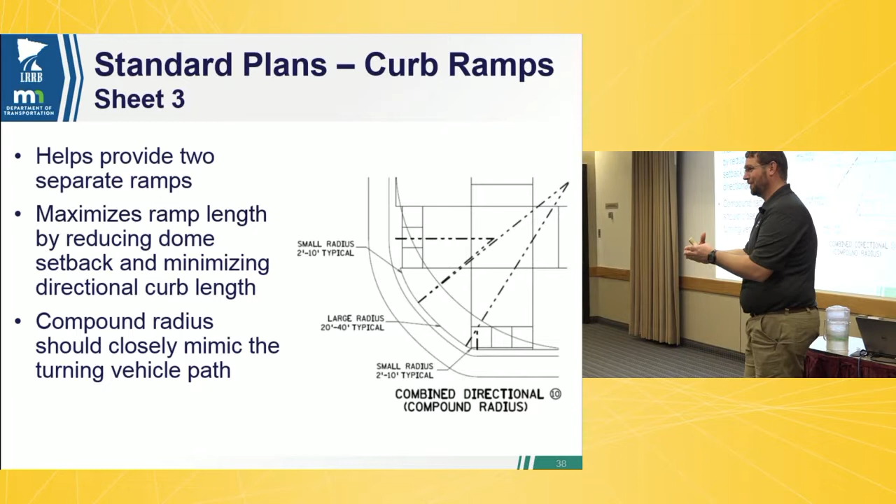Now, I know this is a struggle - we want our radiuses to always be some nice even footage, right? We're all engineers, so I want a 3-foot radius going into a 20-foot radius going into a 3-foot radius - I want that math to work. I'm going to break it to you right now: it doesn't matter. If you need to fit in a 2.8-foot radius or a 25.62 radius, it doesn't matter. How's that contractor going to form up the back of the curb in the field? He's going to take a board and bend it around a couple of grade stakes out there, and that's what they're going to fit. So no matter how much time you spend trying to get those radiuses to work out to the exact even increment, it doesn't matter.

So this is a good tool - it helps us gain that additional ramp length, and again, to separate those ramps out too.

It's especially critical - it helps us when we've got APS, so we get a little additional separation on those APS stations.

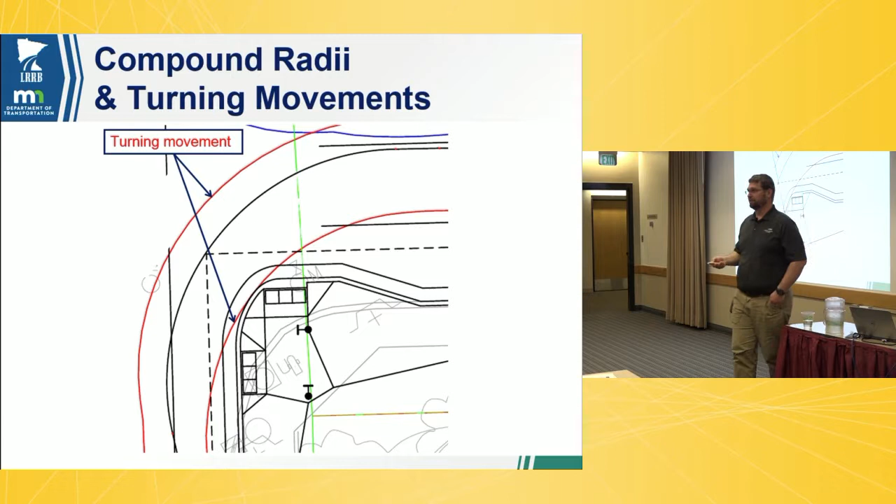So the next detail is our ADA curb extensions with compound radius - it's a fancy name for a bump out. What we're talking about is getting 2 to 4 feet of bump out to gain some additional elevation in those vertically constrained areas. An additional 4 feet of ramp gains me 4 inches of vertical elevation, so it gets a lot of benefit by just going out 2 to 4 feet.

We want to make sure we've got a 5-foot piece of tangent past our zeros, so that a driver coming up there is going to see that curb line coming into the intersection. Otherwise you just have the ramp coming down and touching base with no vertical element. Again, it helps us gain some space on our signalized intersections to get some APS push buttons in there - that's from the ADA perspective.

So let's step back for just a minute - bump outs in general. What are some other benefits of putting a bump out in?

Traffic calming - that's a great instance. We always have on MnDOT projects, I'm sure you guys get it too, trucks going too fast, cars going too fast. We start to pinch that driver in, we put some sort of a vertical element out there - lights, fire hydrants, a planter, some sort of aesthetic. That's a hard word for engineers to say too, aesthetics. But it starts to pinch that driver and slow them down.

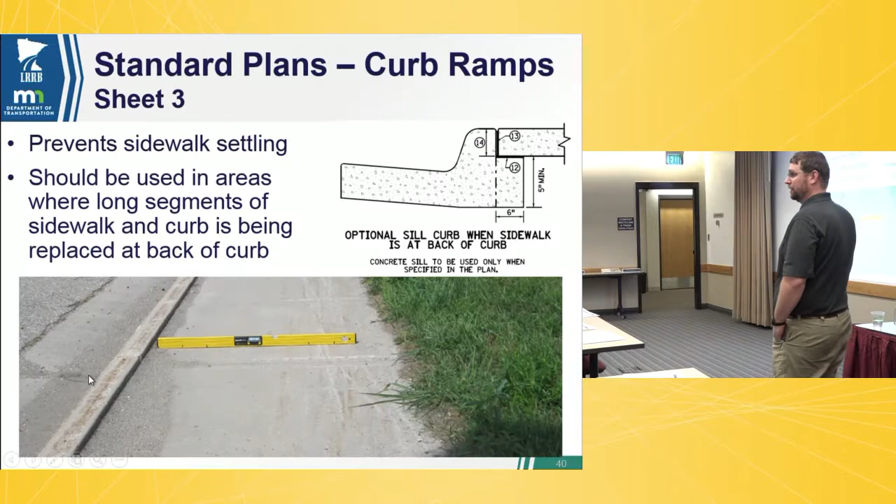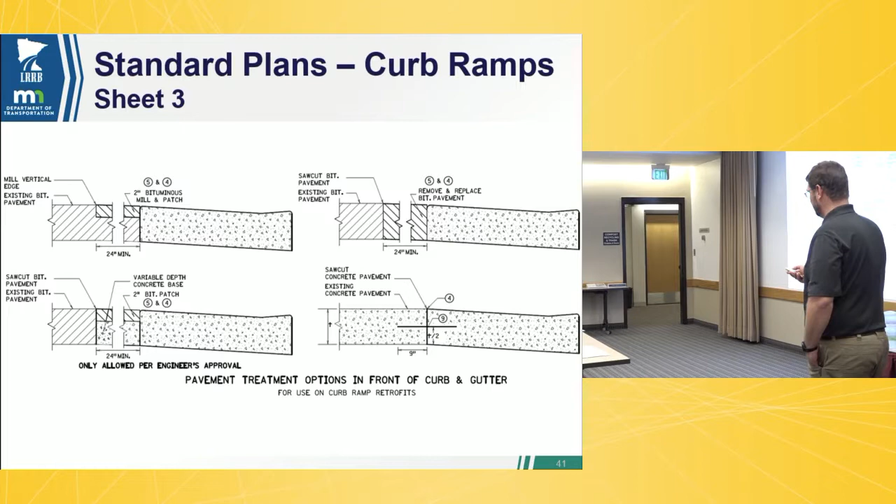A couple of pavement treatment options for you, whether you're doing an ADA retrofit as a standalone project, or doing your ADA improvements several weeks ahead of your mill and overlay, and how to tie those back together. Just a couple things you can look at and utilize as you see fit. Sheet 4.

The purpose of the domes is to inform the user that they're about to enter the roadway. Does this inform me that I'm entering the roadway? No, absolutely not. Let's face it, this is what we were told for a number of years—there was guidance telling us we needed to provide directionality with those domes. The truth is those domes are there to inform the user they're going to enter the roadway. If we can, we line up our domes in a perpendicular nature, and it's not for a visually impaired user.

If we're trying to line those up in a perpendicular nature, it's actually for someone like Todd in a wheelchair going down that ramp—the wheels will go between the truncated domes, minimizing the vibrations going up and down. So the primary focus of the domes is to inform someone they're going to enter the roadway. They do not point you.

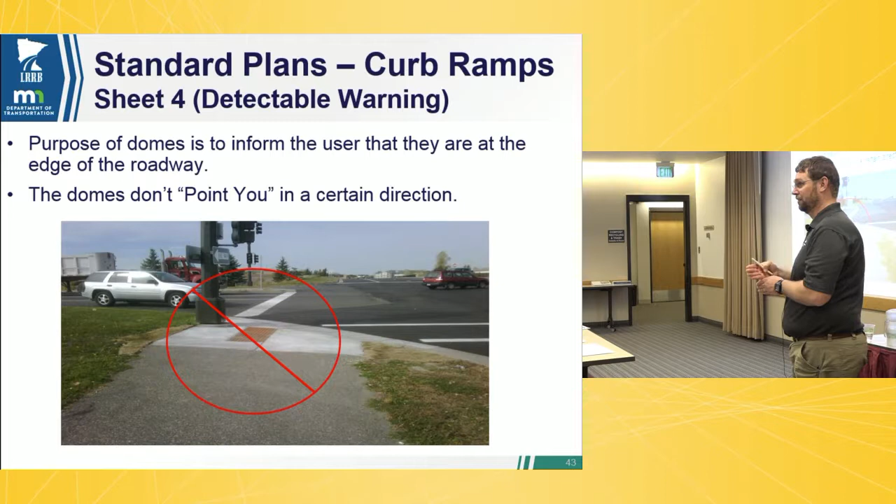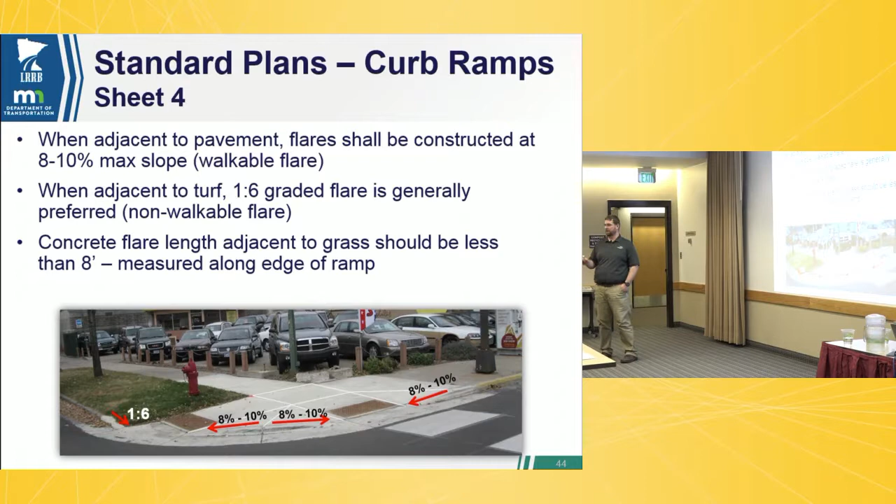So along that, we've got to make sure that our adjacent pavements are at 8 to 10%, so those are a walkable surface in here. And our graded flares, when adjacent to that turf, can be 1 to 6. When you've got a walkable surface coming in here, this needs to be a concrete flare. When you've got turf over here, there's no preference whether this is a graded flare or a concrete flare - that's a maintenance item as far as preference.

We want to make sure that all of our curbs must have that continuous detectable edge. So a curb is a detectable edge - that's going to tell me that I'm entering into my roadway. As I come in here, I've got my curb, I come down to my zero. Within 3 inches of my zero, I'll have my truncated domes. Then I've got my other zero, then the curb taper on the other side, tapering up to at least a 3-inch minimum curb height. That's enough of a curb that we have a visual as you're going around that intersection.

To do that, you're going to come up at 10%. So between these ramps, to get up to a 3-inch curb, you need a minimum of 5.5 feet between those two insides of the ramp. It's going to give you 2.5 feet at 10%, gets you up that 3 inches, 6 inches of 3-inch curb, and then come back down 2.5 feet at 10% to get to the other one.

If we can, we'll go up to a 4-inch curb height in between our ramps - that's our preferred curb height. If you can get up to a 6, stay at a 4. The primary reason is that we don't go above a 4, because a lot of times what you'll end up with is negative drainage, because then your curb height is going to be higher than your landing here, so you're pushing that water back onto here. It's going to be a maintenance problem for you. So we stick to that 4-inch as our preferred curb height.

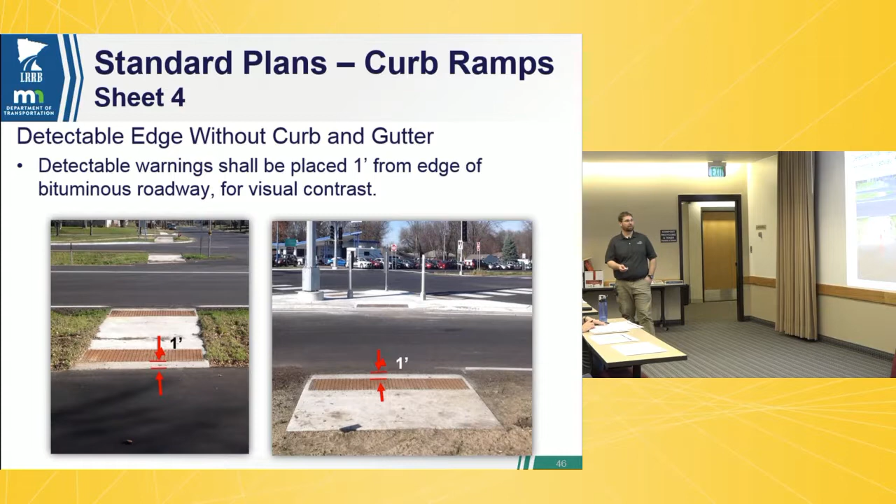When we don't have curb and gutter, we want to make sure that our truncated domes are set back a foot from that bituminous, so that we have a 1-foot piece for visual contrast. So as you're coming across there, you've got your bituminous roadway, a foot of concrete, your domes, and then concrete behind there. That way, a lot of visually impaired users are not totally blind - they'll still be able to see some differences, so they'll see that visual contrast between the concrete and the domes to know that they're going to enter the road.

What's wrong with my detectable edge?

Say that again? It's not a foot back. Exactly, they need to be back. What else do I not have? Perfect, yep - not continuous and not a foot back.

So we want to make sure that we've got those domes back a foot in this application and continuous along here. My grass is going to be the detectable edge as we go around here too.

The other point I like to point out on this slide is this handhole right here - great spot for this handhole in the boulevard, not in the middle of our ramp. Ideally, we want those outside of our ramps and our landings, put them in the boulevard. Now, I also realize that on occasion you end up with that 4 foot by 6 foot by 8 foot deep electric vault that's located right on the corner.

It's going to cost $20,000 to $50,000 to move, okay? In those instances, we'll put the casting completely in the landing. If we put it in the landing area, we can shim and adjust those castings to make them fit within the landing and get it to meet our relatively flat slope of less than 2% in the landing. I'll never put them in a ramp. We haven't seen contractors that are able to shim those lids so that way they're at a sloped angle and make them fit within our ramps.

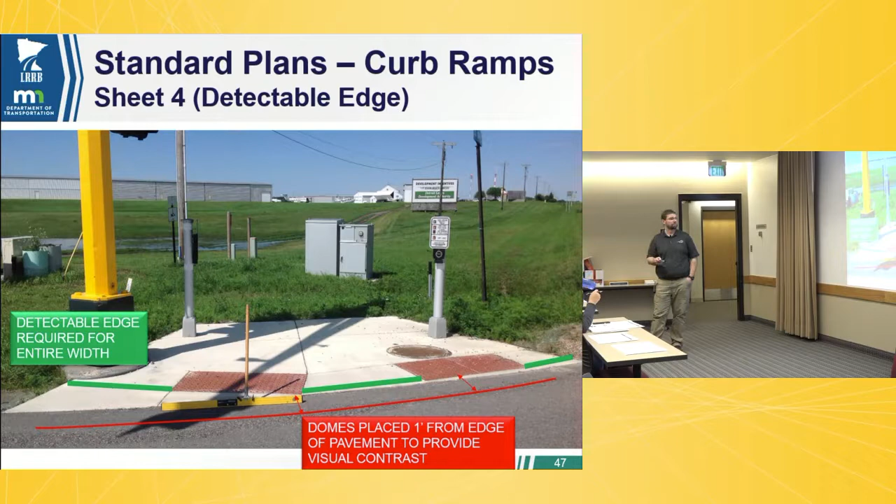However, if you're in a rural area, you need to know how this thing is going to be maintained, because if it's just going to be maintained by the plow truck driver dropping his wing down and going across this, a V-curb is not going to be maintained. So then we'd put a concrete flare on that, a taper, so that way that could be pushed off with that wing of the snowplow. Understanding how these things are going to be maintained is key to know how those treatments are going to occur. The other aspect is if I'm in a rural area, it snows, we do get it cleared out here. It's going to blow 12 hours later and then it's going to drift shut. So again, we want to make sure how these things are going to be maintained, because if they're not being maintained, then they're not going to be utilized 5 months out of the year.

Crosswalks going across railroad tracks, we want to make sure that our domes are set back 12 to 15 feet from the nearest rail. That's what MnDOT is utilizing, 12 to 15 feet. If you look at PROWAG, it's going to utilize 6 to 15 feet. The 12 foot comes out of the AREMA standards, out of the freight rail guidance, saying that we don't want anybody within 12 feet. It's our understanding that probably that difference is looking at light rail setbacks. I sure wouldn't want to be 6 feet away from a freight train going 50 miles an hour. So think about this too, make sure that you're measuring perpendicular from the nearest rail.

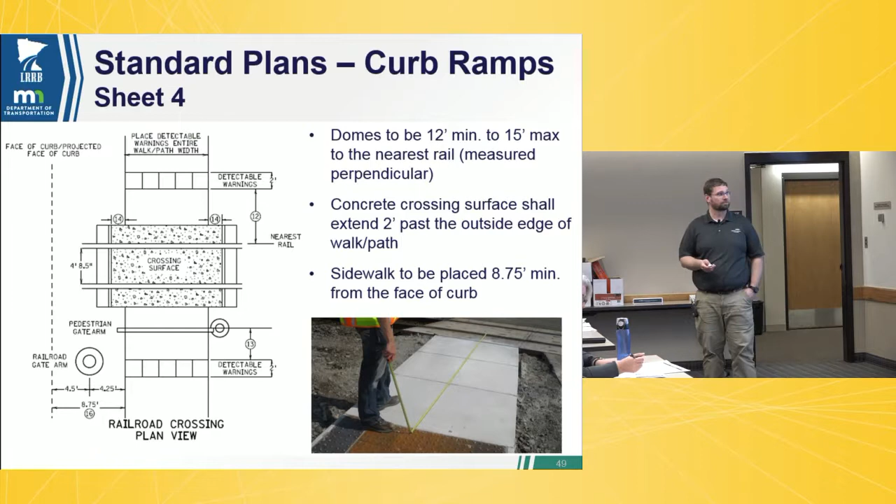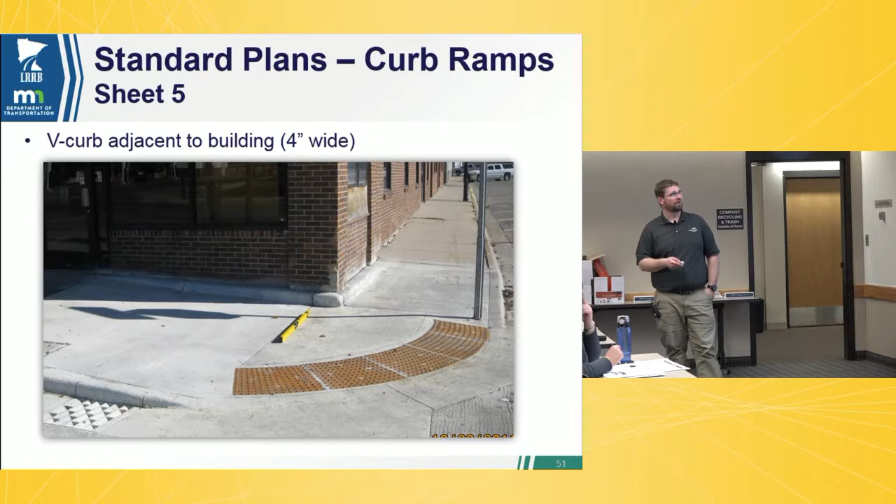We've got 2 different types of V-curb shown here. Number 1 is our preference, where we've got our V-curb outside of our sidewalk line. So as I'm walking down my sidewalk, my V-curb bumps out on the back side, and that's a nice smooth taper, so less chance of me, if I'm in a wheelchair, going up and onto that V-curb.

If you have to bring that V-curb into the sidewalk line, we still need to make sure we have our 4-foot path going through there. But then that's a different taper coming up on the V-curb. It's going to come up quick, so that I'm notified right away to back up and not continue down, ending up with my left wheel higher than my right wheel.

We'll utilize that when we've got a tight vertical or horizontal spot where we can't get the right of way, and put that V-curb out beyond the sidewalk line. In this case, we've got a fence post that's in the way, and a building, so we'll put that V-curb into the sidewalk line.

A couple details here: one with the signal pedestal and one with the push button. When we've got the signal pedestal, we're going to bump our V-curb out around that pedestal base. When we're utilizing our APS push button station, that V-curb is just going to widen out itself and include the mount for the pedestal base.

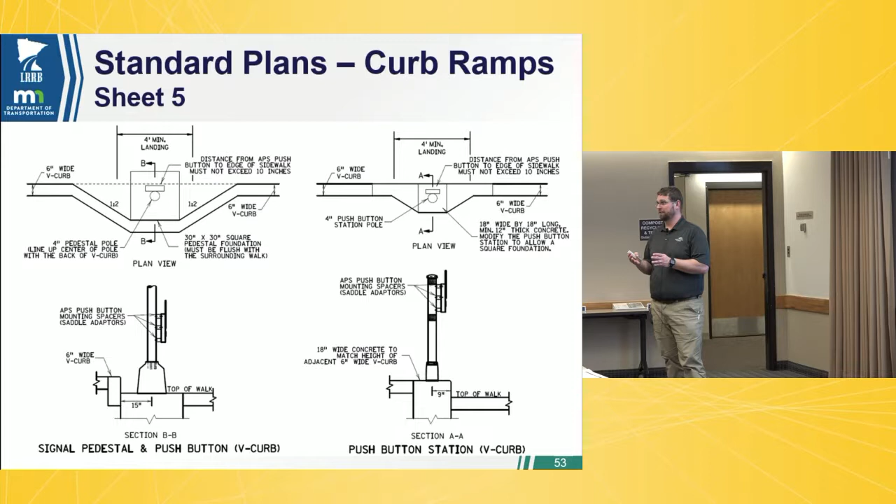So that pedestal base is a 9x9, 9-inch diameter as we go around here. We've just poured our V-curb out with this knob, so that the push button station is just mounted into the top of my V-curb.

Transition panels, okay? MnDOT is putting in all of our transition panels on our projects. When you're coming across, we've constructed new sidewalk at 1.5%, and we're having to tie into something greater than that. In this particular instance, we've got 4.5% cross slope on our sidewalk.

We have 2 options. Either we put in a transition panel, so we blend this back together, or we put in a 2-inch trip hazard. We're opting to put in the transition panel. The key part here is that we want to make sure we're taking out 0.5% cross slope for every running foot on our transition panel. So I've got a 3% difference in my cross slope here, and I'm going to end up with a 6-foot long transition panel.

The other part I want to remind everybody in this room: MnDOT's putting in transition panels. If your project comes up into one of ours, make sure to remove this transition panel. We've seen it in a number of locations where we've done nice ramps, put in a couple pieces of sidewalk, and put in a transition panel.

A local agency comes up, does a sidewalk project, puts in new sidewalk at 1.5% cross slope, and we're always so hesitant to tear out a new piece of sidewalk, so we put in a transition panel of our own. We've got nice sidewalk, and 10 feet of sidewalk that goes up to 4.5% cross slope. So make sure to pull that piece out. Check what you're tying into as far as cross slope, and maybe remove one piece of new sidewalk to get to that good cross slope. Otherwise, we've just created a barrier up and down that sidewalk by having that one piece in the middle there.

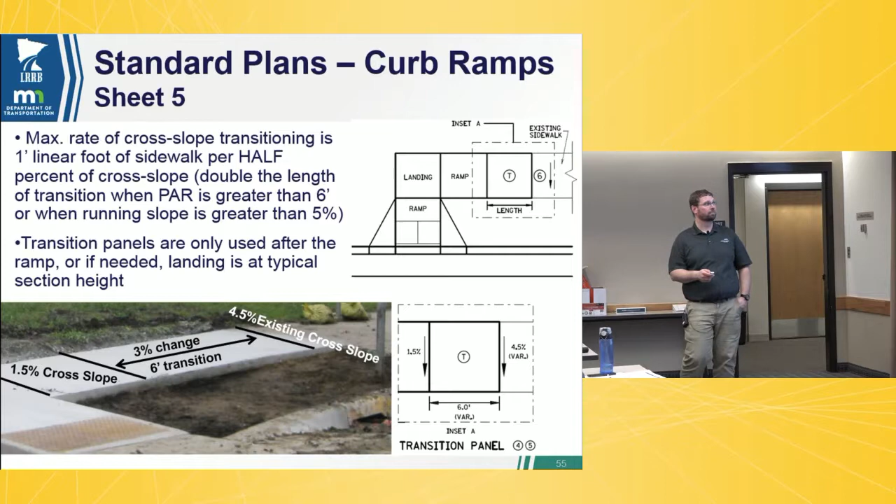Sheet 6 shows our new landings with the reinforcing bars, those tie bars between the landings and the ramps and the sidewalks, so it's showing those details. If you're utilizing the MnDOT specs and special provisions, we're paying for drilling and grouting and reinforcing bars by the each, and those are all epoxy coated. We've also got the drilling and grouting on the curb and gutter retrofits too on that reinforcing.

These details show where we no longer put expansion material at the back of the curb. All the expansion material is occurring back here at our tangents. We've got two different details for how we're reinforcing this and tying it together. In this particular instance on the right, we're tying those rebars, utilizing those bars into the curb and gutter.

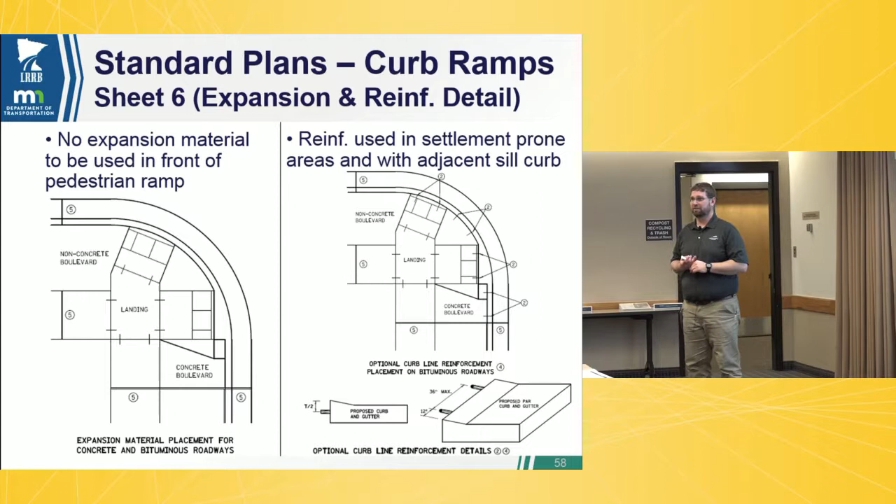We'll utilize that instance if we've got a bituminous roadway and a settlement-prone area where you're concerned that your sidewalk is going to settle out from the back of the curb. But if that's a concrete roadway, we're not going to have a reinforced concrete roadway tied into the curb and gutter, tied into our ped ramps, tied into our landings all the way back. That's too much, so we'd still just stick with the one on the left in a concrete roadway scenario.

So when we've got greater than 2% slope on our flow line coming around, we need to table those out as we're going across our pedestrian access route. We're going to table those at 2% max, or up to a 4% change. We'll walk through a couple examples of where we'll go greater than 4%, but really that seems to be about the max that we can table things, about 4%.

What we're showing here is that when we're tabling this, we're going to blend our bituminous out through our parking areas, through our shoulders. We're not going to blend that through our driving lanes. We still want to make sure we're maintaining that through traffic flow, the rideability on that through traffic.

Now, if this is a stop sign here and I'm stopping traffic, I'll blend this all the way out to the center line. Because if I'm tabling this and blending it through here, and this is a stop condition, the driver or rider isn't going to feel that as they're going through at low speed. So when you've got low speed conditions and a stop condition, don't be afraid to table or blend that further out into your roadway.

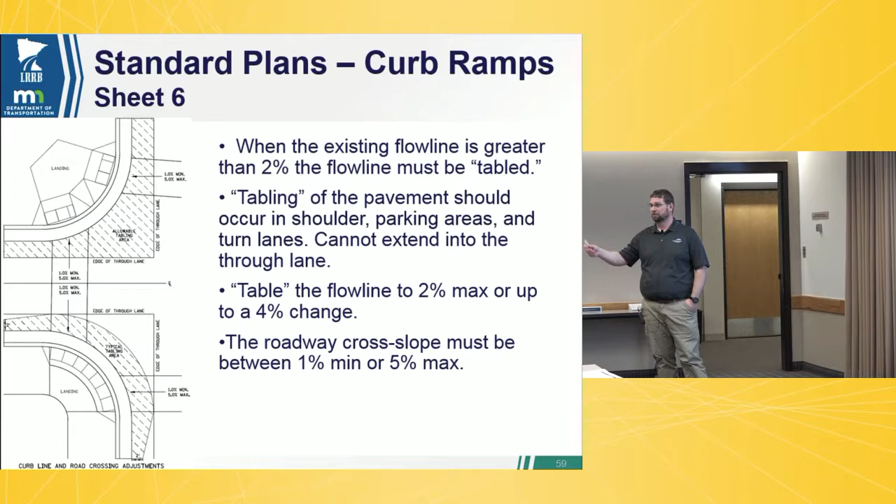So we've also got some example profiles in here. In this particular instance, we'll change up to 2%. We'll come across our ramp at 2% max. Ideally, we're at 1 to 1.5% going across here.

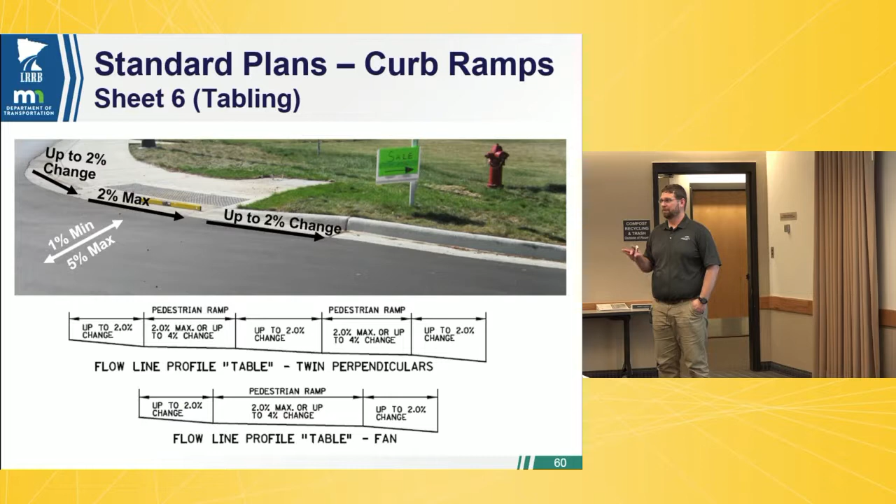When we've got two ramps, we talked about a lot of the benefits. One thing is we've got the ability to dump grade between those ramps. So we can go 1.5% across here, dump grade between my ramps, and this is my secondary ramp on my curb profile. If we're in a fan, we come in, we're tabling this, changing grade up here, and then we've got a long area all the way across that fan ramp that's now tabled at 1 to 1.5%. So you lose the ability to help drop grade as you're going around to return with a fan ramp versus if you have two separate ramps.

We'll do the same thing with tabling, only we'll raise intersections a lot, and we'll talk through a lot of scoping of where we've done that in a number of applications. In this instance here, we raised this curb line 4 inches. When you raise a curb line and you're giving the contractor a profile elevation for that new curb line, and you've gone up 4 inches, make sure to clearly put that on your plans. Here's the new elevation with a note right behind it: raise curb 4 inches. Otherwise, you've got a lot of potential for that to not occur.

First one, your surveyor goes out there and stakes it. He's got his head turned on straight, and he looks at your stake and he goes, well geez, Joe must not have known what he was doing, let's adjust this grade down for him 4 inches. So he pounds the stake down, makes that grade adjustment, and you've just lost that 4-inch gain that you wanted.

Or the contractor does the same thing, because they think, well, this isn't matching my existing bituminous if I'm doing a mill and overlay. So make sure that if you are doing some sort of a raise, to clearly define with your notes what you're wanting to do. If you're wanting to raise 4 inches, make sure it's raised 4 inches.

In this particular instance here, we did have a real tight, vertically constrained doorway back here. So we raised this, put in a new high point, and then we were able to put our 1 to 1.5% across our pedestrian access route and then dump grade coming around the intersection.

Same way over here, we had our high point. We'll go around 5% going around this intersection, get to our PAR at 1 to 1.5%, and then dump grade going into this instance. Now sometimes we'll add catch basins on both sides so that we can artificially put in that high point in that intersection and catch the water on both sides. It's a good way to bring your curb line up by just adding a drainage structure.

If we weren't going to raise this curb line, there was no way you were going to get your ramp grades to work tying into that doorway, because that's a fixed situation.

So that's why we're raising the curb line. These types of modifications, especially when you've got doorways, tie-ins, things like that, it's much easier to raise these curbs on a mill and overlay type project, just because you're paving in your new bituminous. Again, these shoulder slopes are often fairly steep, so you're not always doing a 4-inch intersection raise, but just correcting a steep shoulder slope is quite common.

You can do this on a standalone, but it'll take a lot of patching. So thinking about how you program projects is important, because ADA will let you do it either ahead of or concurrent with a preservation project like an overlay. So these tricky ones, it's definitely better to do them with overlays, because you have more freedom to change some of your constraints. This would be harder on a standalone.

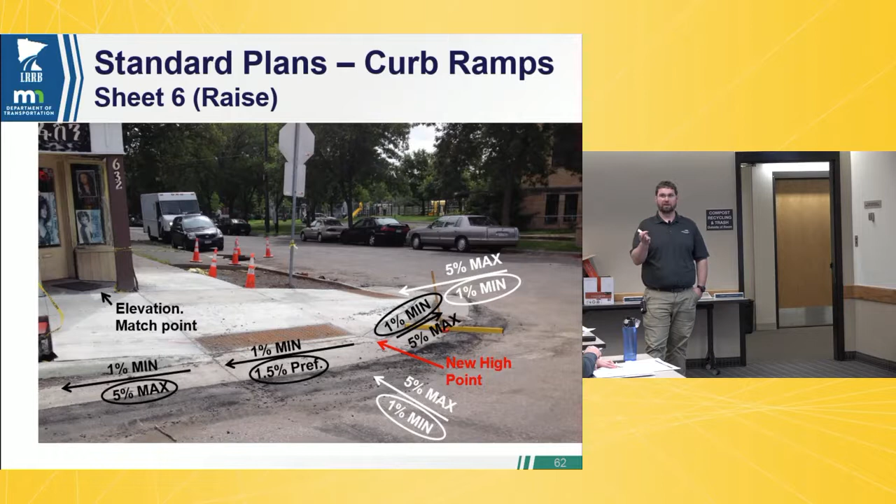Yeah, and if you're at those extreme cases where you're at 8% or more, you're going to have a hard time, and we're going to show a couple examples where we might not table this all the way out to 2%. If your slope is really steep coming around here, we're only going to change this 5% slope, because otherwise we start doing too much, and we'll show you a couple examples. But on this particular case, if you were chasing this and made it work with your road, and then you were dumping this at 8%, there are a lot of situations where I would do that, especially if we've got a stop condition.

I'll show you one too this afternoon where we did that in Rushford, where we tabled off our intersection and brought it over at 2%, and then we tied in at 6, 8% going down our roadway, but it was a stop condition there too. So I think some of that depends on what your traffic flow is going through here, on how hard to push that turnover, if you will, on that grade break.

These are just general guidelines, just to keep you out of trouble, but you can steepen that 5% up. The ones you really don't want to mess with are the cross slope in front of the curb ramps, and also the roadway cross slopes: 1% minimum to get the drainage into your gutter, and 5% maximum on your roadway slope.

Those are the true ADA type criteria. So your cross slope works, you have drainage, and your curb ramps work.

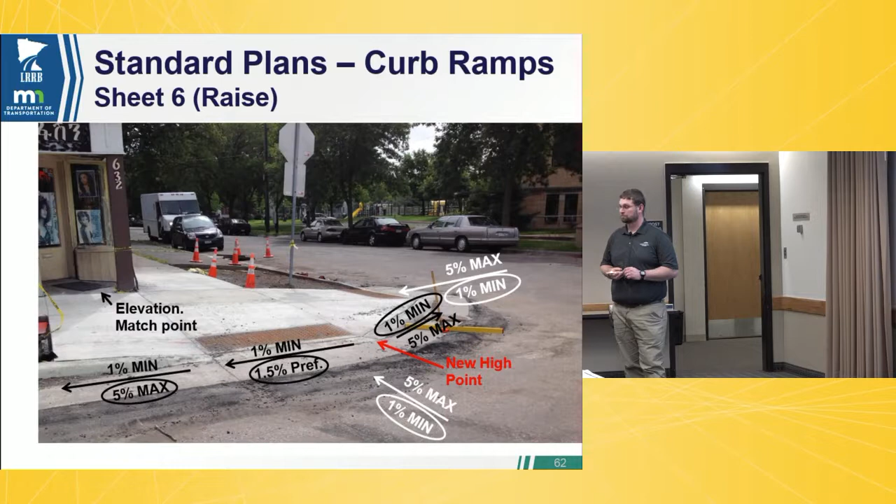I should have pointed this out earlier too, there's a number of things we're talking through. As a city or county person, you might wonder why you'd do that when you could still make this fit with your mins and maxes. A lot of what we're sharing with you today, you've all seen it, where we've gone in and done ramps and then torn them out and done them again. So please learn from our mistakes. You don't need to create them on your own and learn from them.

MnDOT's been doing this for a number of years. We've done things that haven't worked out the greatest. So from the local side of things, utilize our best practices so that way you don't have to learn from the same items we've learned from over the last several years.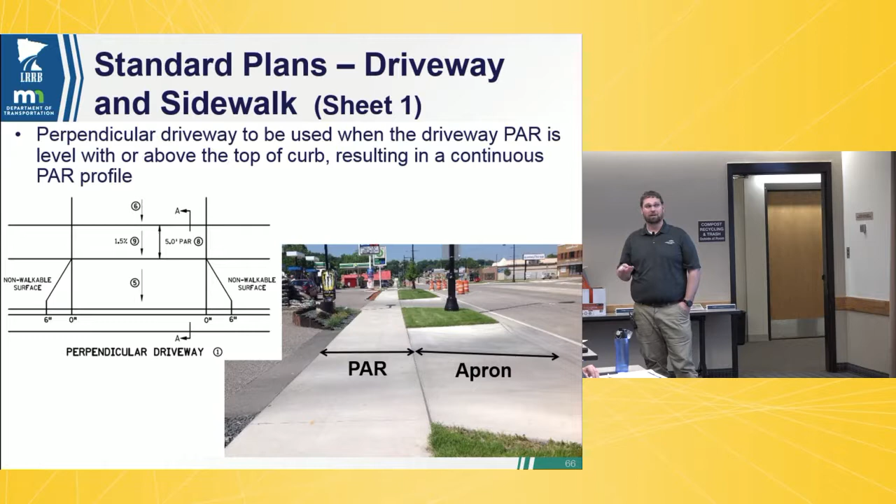Driveways, again, so we're at perpendicular driveways, we've got several types of driveways that we're going to utilize. Perpendiculars are our best type of driveway. We've got plenty of apron, plenty of boulevard here to get our grades up to our pedestrian access route through our sidewalk. Ideally that apron is still at 8%, but we're keeping our consistent sidewalk profile going up and down our roadway.

Now, when we don't have enough boulevard to get our grade up to our sidewalk profile, we're going to steepen up this apron as much as possible, and then we're going to come and put our PAR in here. So we've got to make an adjustment to our sidewalk profile as we're going down here.

Similar to our tiered curb ramps, we're going to do tiered driveways. You're going to change your sidewalk profile and go down at a flat slope, go through your driveway, and then come up at a flat slope at those 2 to 5% changes. We don't want steep slopes on that sidewalk profile. That's a usability issue. Plus, if you go with a steep ramp, you've got to have a landing at the top. We want to keep our sidewalk profile less than 5% as we're going up and down our corridor.

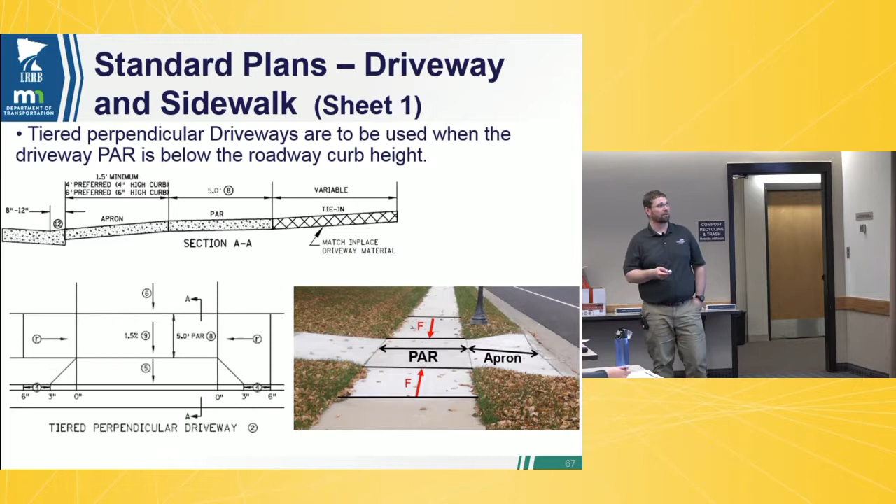When we've got that sidewalk at the back of the curb, sometimes we'll offset our sidewalk to get through those driveways. So we'll taper that sidewalk back. Ideally we're doing a 1 to 5 taper because we want a nice gradual transition, so if I'm walking down the sidewalk it's very easy to walk back and forth as I'm going through that driveway. If you've got a very abrupt taper, chances are your pedestrians are just going to walk straight through that driveway.

And we'll also offset and adjust grade, so that way you help on both aspects. You gain a little bit of apron and you're going to lower your sidewalk profile.

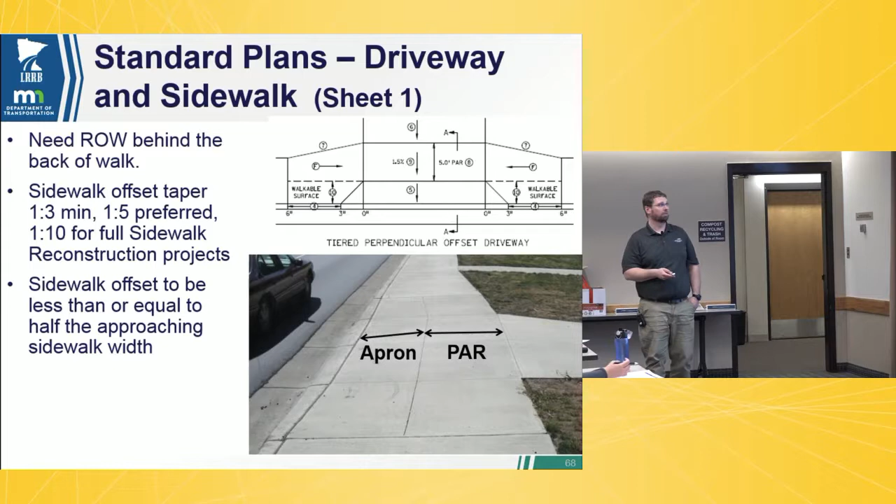Parallel driveways are going to be utilized when we've got negative slope off the back. They're also going to be utilized whenever we've got sidewalk at back of curb. Whenever we've got those instances, we're going to use our driveway type 2 curb and gutter, which has a 1-inch bump with a 1-inch taper off of it, so that we're maintaining that drainage out in the roadway. We're also trying to minimize how much we're going up and down with our sidewalk profile.

So if I'm going along my sidewalk profile at 6-inch curb height, and now all of a sudden I've got to go down on my driveway to a 2-inch, I'm going down 4 inches on my sidewalk profile, and then I'm having to come back up 4 inches. So that's why we're trying to minimize that roller coaster effect.

Now the other thing is, if you've got a driveway every 50 feet, another driveway 70 feet, another driveway, kind of repeating all the way up and down your corridor, think about utilizing a 4-inch curb versus a 6-inch curb. If you change that to a 4-inch curb versus that 6-inch, then you're only going up and down 2 inches on your sidewalk profile. So just something to think about, if you've got continuous driveways and sidewalk at the back of the curb, switching to a 4-inch curb height is going to help minimize that roller coaster as we're going up and down our sidewalk.

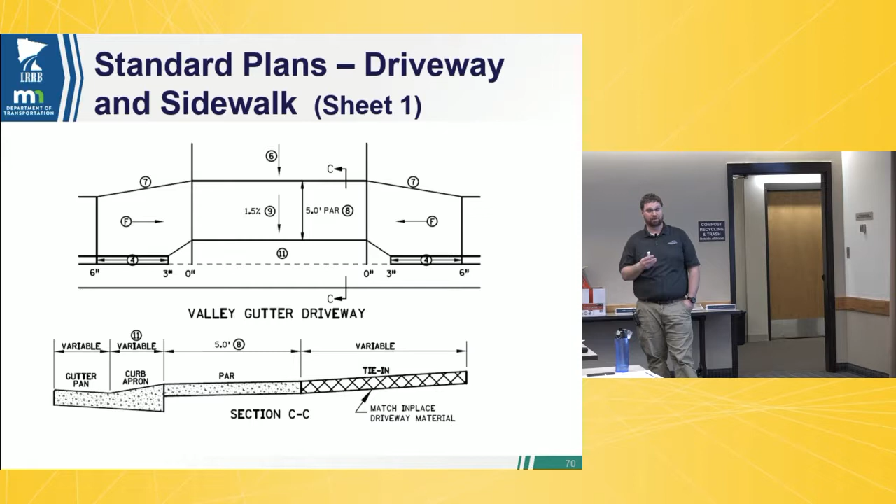So it's going to clearly define where my pedestrian access route is, and clearly show what my apron slopes are. So it's a good tool for the contractor and construction staff to know what your plan was, what your intention was on those driveways going through the project.

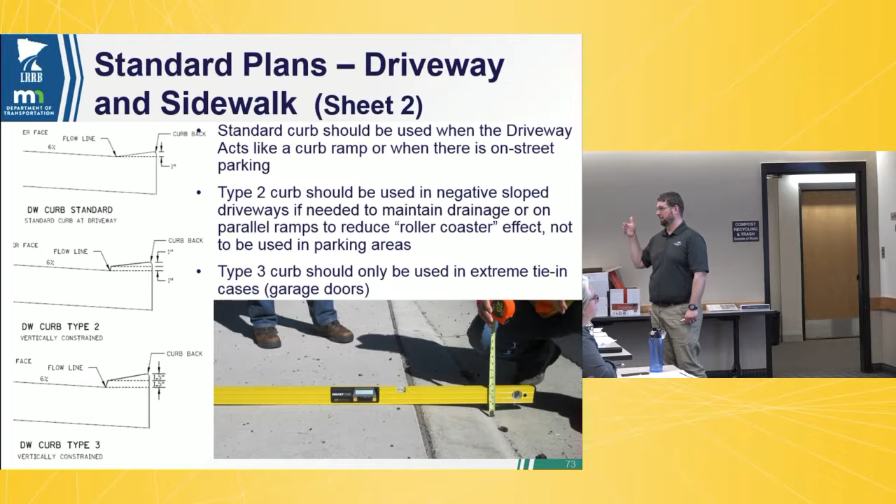So that's a really big bump if somebody's having to navigate that with a car. Ideally, we're just going to say get some additional temporary easement and go back onto private property with tying in that driveway and those vertically constrained points. But if you've got that garage that's up against the right-of-way line, then we'll utilize the type 3.

Sidewalk transitions.

So we're no longer putting in expansion between our sidewalks and our driveways. We're now putting in tapers on the thicknesses for that sidewalk. So we're going from our 4-inch sidewalk and matching our driveway thickness. So if you've got a 6-inch driveway, you're going to have that transition panel that's going to go from your 4-inch walk to your 6-inch driveway concrete thickness. So we're no longer putting that expansion in there.

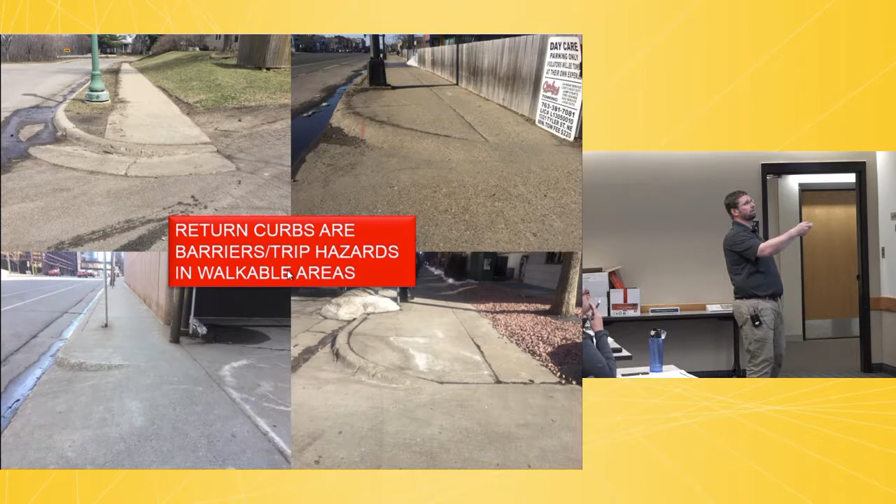So this is some examples of where we've got the wraparounds in the driveways where we're wrapping that curb around. And the top ones, these are true barriers. We've got this curb that's coming all the way around here through our pedestrian access route on both of those, so we've got a true vertical element that's inhibiting my access up and down the path.

Now in the bottom two, I've still got maybe 4 foot through here, 4 foot through this one. But if I'm walking up and down this sidewalk and you're walking shoulder to shoulder with somebody, that's a pretty good trip hazard for somebody that's closest to the roadside there too. So ideally, we've got those tapers and not wrapping that curb as we're going around those intersections. And you also got to think about it from a visually impaired user standpoint—you don't want any trip hazards where a pedestrian could be walking. So these return curbs, even if they aren't in the pedestrian access route, they are also a trip hazard. All 4 of these are examples of trip hazards.

So at MnDOT, we use all flares on our driveways when we have a walkable surface. I know there's a lot of details like this where it's always a return curb if it's a walkable surface or grass. In grass, it's okay if it ends at the sidewalk, but we wouldn't recommend these in any walkable area.

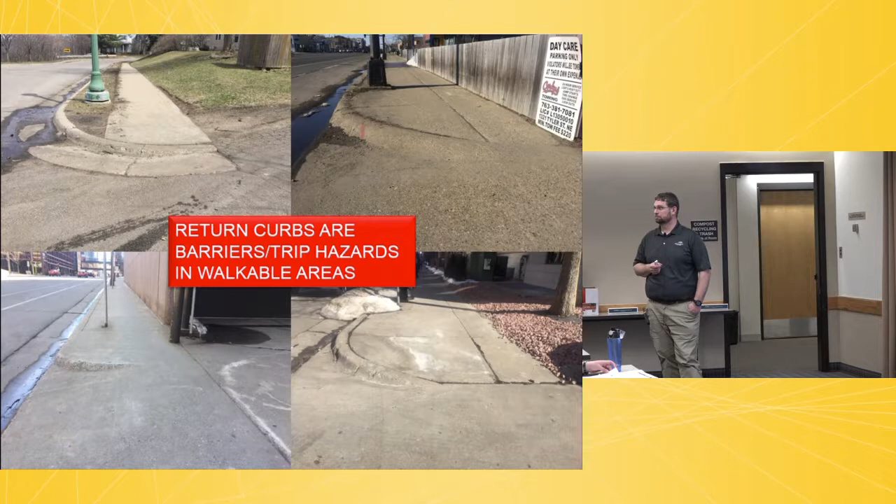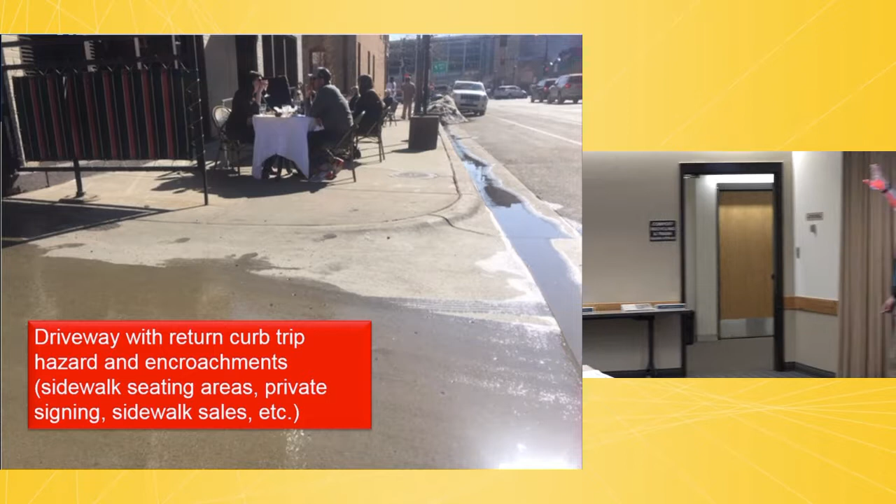Same way when we're going through here, obviously our pedestrian access route should be back adjacent to the building, and that's right where they've got their tables and chairs and everything else set up. So now I'm having to navigate down the sidewalk out towards the back of the curb, and then follow that back of curb line around on my driveway, because otherwise I come out here and I've got a trip hazard. So it's just those graded flares, those tapers, that are going to blend through so that way they're a walkable surface and not a trip hazard.

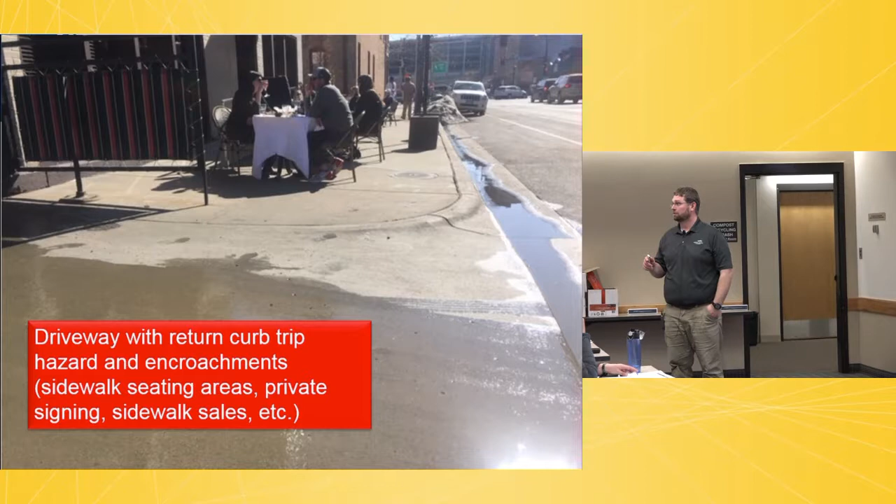The concrete flare, sorry. Yep. Sheet 4.

Want to make sure when we're adjacent to buildings that we've got that positive drainage coming away from the building. Earlier I mentioned we've got 5 foot as our standard sidewalk. When we're adjacent to a building or a continuous vertical element like a retaining wall, we're going to want a 6 foot minimum to provide for that 1 foot shy distance away from that building or structure. So we want that 6 foot par.

We're going to put any sort of pavers, stamped concrete, those architectural features out in our boulevards. We want those clear out of our pedestrian access route, because that's going to provide a lot of excessive vibrations as we're going through there.

When our sidewalk is meeting up with the doorway or a step, we need to make sure that we're providing for that landing out in front of that doorway or step. So if something's coming onto the right-of-way, we've got a door entering onto the right-of-way, we need to make sure we have that landing zone out in front of that door. This is really where Title II meets Title III, your right-of-way requirements versus your building code requirements. This is building code pushed out into the right-of-way so that way we have access into those buildings.

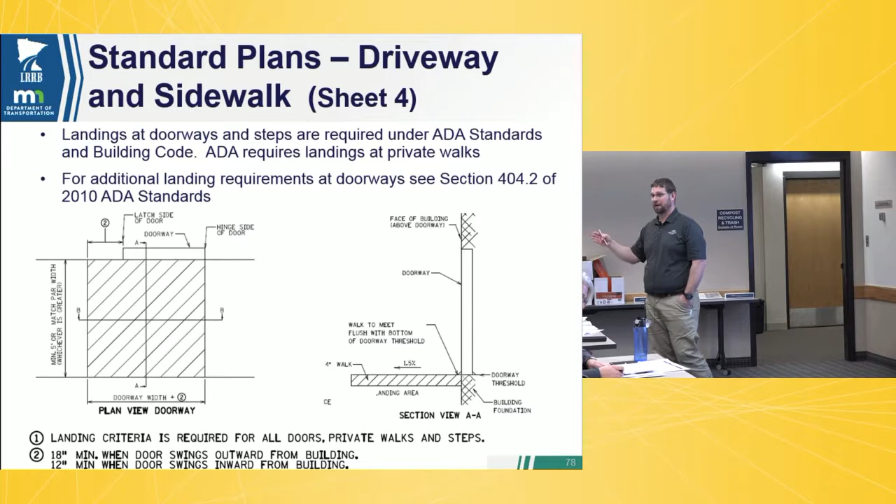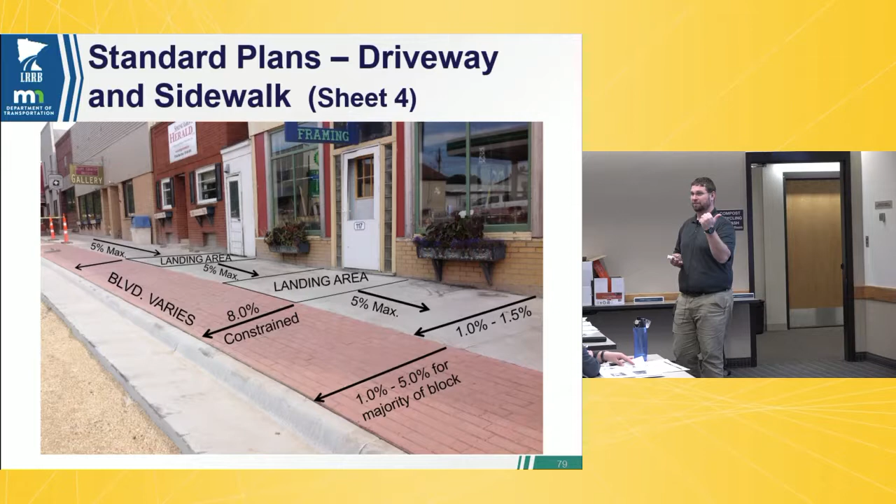Our boulevard slopes, ideally our boulevard slopes are 1 to 5% across the majority of our block. That's where we want those to be. If we've got a vertically constrained point for a short area, we'll go up to 8% on those boulevard slopes. But think about this: if you're parking on this street, you're stepping up a 6-inch curb. If you're stepping onto something that's greater than 5%, that's a very awkward step. Plus if you've got pavers or stamped concrete in there, those are going to be prone to being full of ice and snow. You've got the real good possibility of a fall right there.

So again, those bricks, pavers, excessive jointing, good spots for those are in the boulevard, we keep those out of our pedestrian access route, because those are going to be rolling resistance. If you ever have an opportunity, hop in a chair, go down some pavers. There's a lot more push to going up and down those. They're trip hazards. They're also going to cause a lot of painful vibrations for some spinal cord injuries. And also we've got those maintenance issues, whether it's snow and ice or the pavers just heaving over time.

One thing that we're requiring for MnDOT is we're telling them to make sure that the landscaping plans have been reviewed by the ADA staff, or make sure that your engineering department looks at those prior to rolling them out to the public. We've had a number of instances where some of those stamped concretes, those pavers, are shown within our pedestrian access route. We show those to the general public, and lo and behold, that's what they prefer, and then we have to take a step back and say, no, we're not going to do those particular instances.

So here's a good example. We've got our clear pedestrian access route. We've got our street furniture. We've got those pavers in the boulevard outside of that clear route.

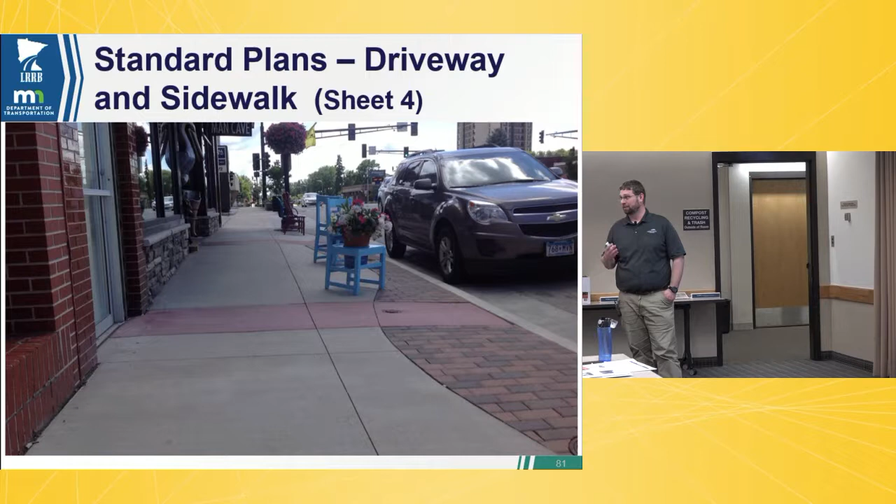Any questions? We'll keep recording here for a minute. I like to kind of throw in some points here from a personal perspective.

First, being on the pavers. Like Tim was talking about, there's definitely rolling resistance in there, but also, since I have a spinal cord injury, my nervous system is really hypersensitive to my level of injury. So just going over those little bumps, which wouldn't be that big of a deal to a lot of you folks in a chair, it can really set off really sharp electrical shocks in my legs. So just wheeling down there is like getting the shock treatment. So believe me, I personally don't like those pavers.

But there's also, even when you have excessive jointing, a large project got done in the metro probably 20 years ago where they had the window pane jointing, 2x2s with excessive joints and whatnot.

The week it opened, many people in wheelchairs did not like that. They thought that was the worst idea ever. It looked great on paper, and the business community liked it, but it was really tough on wheelchairs with the vibrations and extra wheeling. It's still out there 20 years later. If I was bouncing along that corridor for 20 years, I would get really frustrated, more so than just visiting an area. So that can really make a difference.